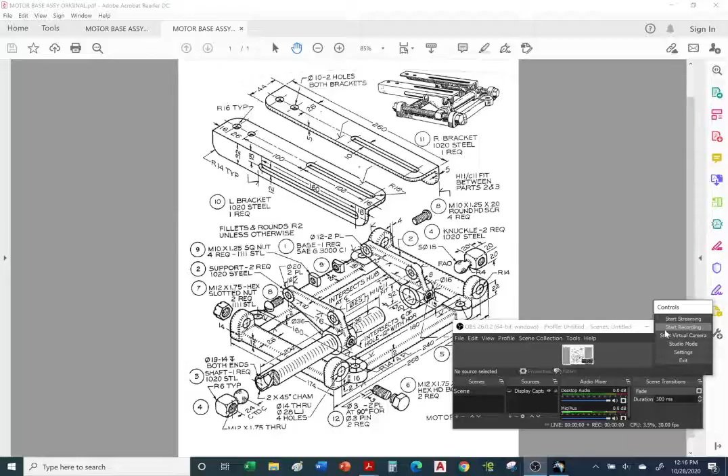Motor base assembly. For this assignment, you're going to model all the components for the motor base assembly. As far as the hardware, the bolts and nuts, you can either download them or model them yourself, but I'm also going to email you the loose hardware, bolts and nuts.

Notice that this is in millimeters, so units are in millimeters. You can tell by the threads. Anytime you see an M in front of a number, it's indicating metric units. In this case, 10 millimeters for the major diameter on the threads. Here's another example: a bolt with a major diameter for the threads of 12 millimeters.

Let's take a look at the base plate first. You're going to model the base plate first. This is probably the most complicated part you're going to model in this class, and this can be very confusing, so I decided to create a second handout. This is the original handout we've been using for years, so I decided to create a more simplified version and break it up into different pages.

Once again, we're going to model the entire assembly. This is the top assembly, and it's going to be made up of smaller assemblies: this smaller assembly, this one, and this one. Let's go to the next page so you can see the smaller assemblies inside of the top assembly.

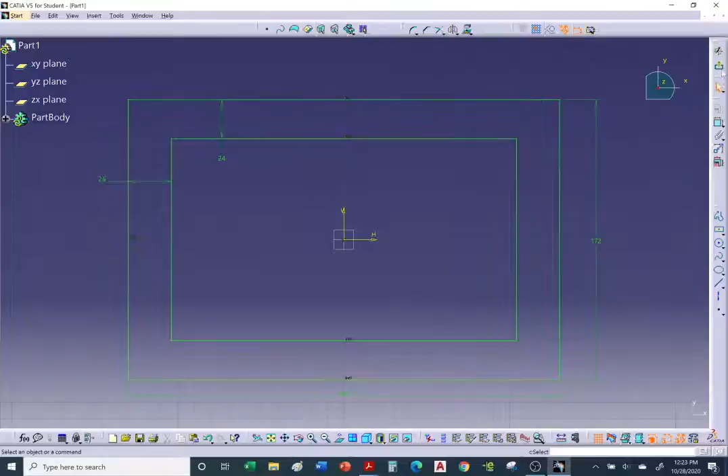Okay, so now we're going to do a pad. If we go back to the drawing, the pad will be 12 millimeters. Now we're going to cut it in half. We're going to go 6 millimeters in each direction for a total of 12.

Okay, so we're going to do a pad of 6 millimeters. Preview. There it is. But we're also going to mirror it so it goes 6 millimeters in the opposite direction of the sketch. There it is, preview, and that's a total of 12, and okay.

All right, so now let's do a sketch for the tabs. Okay, so we have our tabs. We'll just have to draw one, and then we'll do mirror to create the other three. Note the distance from the edge to the center of the arc or circle is 18 millimeters, and the radius is 14. We'll come back if we need to check the dimensions again.

All right, so we're going to do a sketch again, and I'm not going to do it on the surface. I'm going to do it on that same XY plane as the first sketch.

All right, so instead of using profile or arcs and lines and circles, I'm going to use elongated hole to create that profile. So I'm going to go to elongated hole, one of my favorite commands.

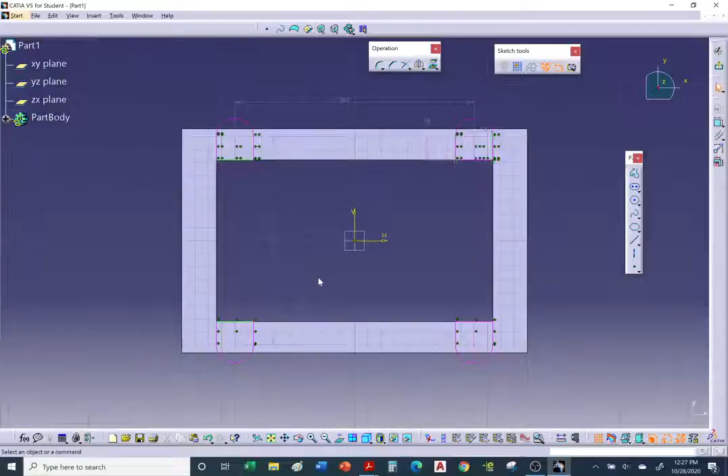Now it's over constrained. So we can either delete it, the 160, or double click and turn it into a reference element. It'll place it in parentheses and it's a reference only dimension.

Okay, click in space to deselect. Everything looks good. Let's do a tool sketch analysis. Everything is closed. Let's exit.

Now, one thing about the tabs here, I want you to notice it's centered with respect to the neutral axis of the first pad. That's because we did our first two sketches on the same plane.

Now, if we go to the drawing, you can see that the tabs are thicker than the frame. The frame is 12 millimeters, the pad is 16 millimeters. If you go back to the original drawing, you can see that the tabs are 16 millimeters in thickness and the rectangular frame is 12 millimeters. Okay, so we'll go with 16 for the second pad.

Okay, so we're going to select our second sketch, do a pad, and this time we'll go up to 8. And don't forget to mirror it, so it'll go also 8 in the opposite direction for a total of 16. And there we have it, as you can see.

Okay, now let's do the next set of pads. So now we're going to do this pad, and later we will address the issue of the 174 versus 172.

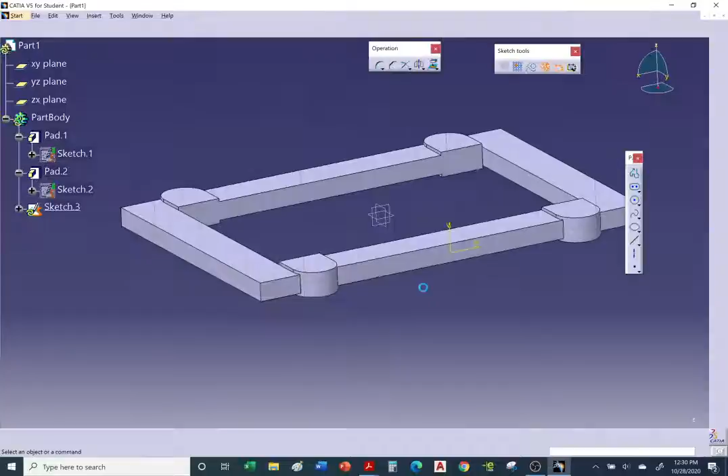Okay, so let's zoom into this area. Once again, I'm going to use elongated hole like we did on the previous sketch. Just guesstimate the size for now. Okay, so we're going to use a radius of 14.

Enter. And like on the previous sketch, we're going to draw a line from tangent to tangent point. We're going to now select the arc and turn it into a construction element. There it is, as you can see. Then click in space to deselect and turn standard back on, or else any new elements you create will come out as construction lines or dashed lines.

All right, so let's go ahead and let me hit normal, make sure everything is parallel. All right, so now I'm going to pick this edge, hold on to the control key, this line, and add a coincidence constraint.

And once again, the distance from the bottom of the surface to the center of the arc is 22. And we have a 4 millimeter offset from this edge of the rectangular base to the edge of the tab is 4 millimeters.

Okay, now we're almost there. Now here we have an issue. Notice there's a gap here. We need to fix this. There shouldn't be a gap here.

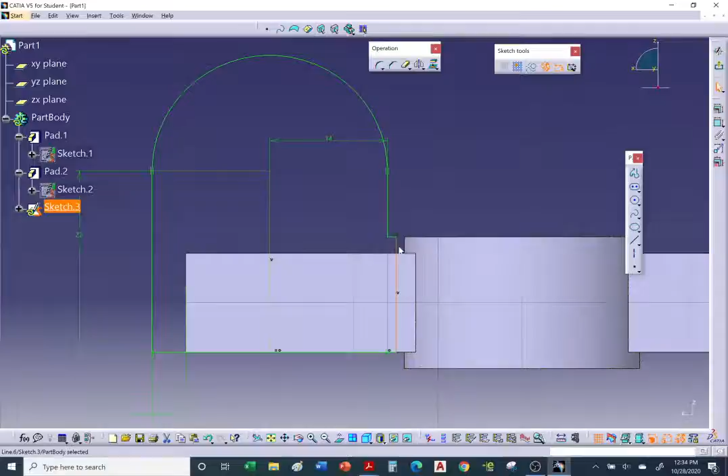Now we have a profile that's closed. One thing we don't want is this line to be too far from this tab, where it still creates a gap. We want to close off this gap, so we're just going to extend it so it clashes into this pad, which is okay. It's okay if we create a pad that clashes with another pad, it'll just blend in. So it doesn't matter how far in we go, as long as it stays inside this pad.

So I'm going to put a dimension here, and we'll just round it off to a nice number. I'll round it off to 10. It should work. There it is, and there's our profile.

Let's do a tool sketch analysis. Notice it's closed, okay, everything looks good. All right, so let's go ahead and exit.

Once again, we extended this so it can blend into this pad, so we can have a nice transition with no gap. Okay, exit. Oh, one thing I did forget to do is I forgot to mirror it over.

Let's go back to the sketch, double click on the sketch. I forgot to mirror it over to the right side. Let's select everything, do a mirror about the vertical. There it is, tool sketch analysis. Good, everything's closed. Yep.

Exit, and we'll do our pad. We'll do our pad and then mirror the pad over to the other side. Let's take a look at the drawing, see how much the pad is on this one. Here it is, 14. Okay, so a 14 millimeter pad for this tab.

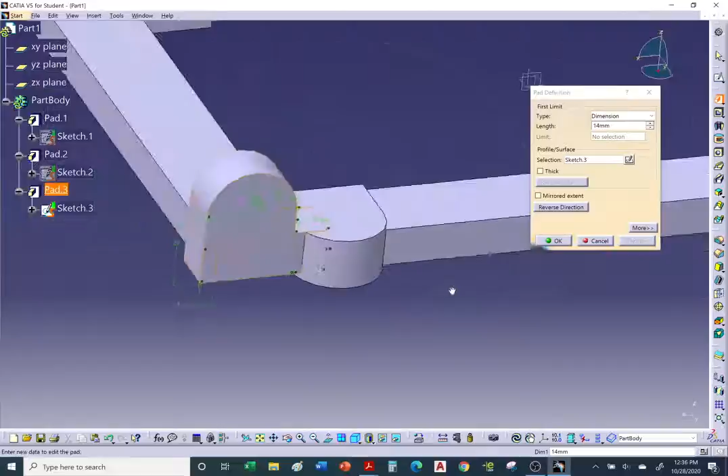And okay, notice there's no gap now. That's what we wanted, we wanted to get rid of that gap. That's the reason we extended, so it did blend into this solid.

So it did a Boolean operation and just blended the new solid into this one, and same into the frame. It did blend it in.

Okay, so now let's mirror these two tabs. I'm going to select the pad, the last pad we created, and we're going to use the mirror. Use mirror, and we're going to mirror it about the vertical. Oh, wrong one, this vertical. There it is, there's a preview. Hit preview to see the solid. Looks good, and okay.

All right, so everything looks good. Now let's address the 174 dimension. So going back.

Okay, so remember we talked about the 174 versus the 172. It's 172 from here to here, but 174 from this edge to this one. So let's check those dimensions.

Now, if you want to leave it alone, I'm not going to take any points off. If you want to leave it the way it is, it's okay, I'm not going to take points off. I know this is a very complex part, so I'm being lenient on this one when it comes to grading. But if you want to fix it, let's take some measurements just to double check.

Use your measuring tools. So this is 172, as it should be. But from here to here should be 174, and it's not. So if you wanted to do it correctly and fix this...

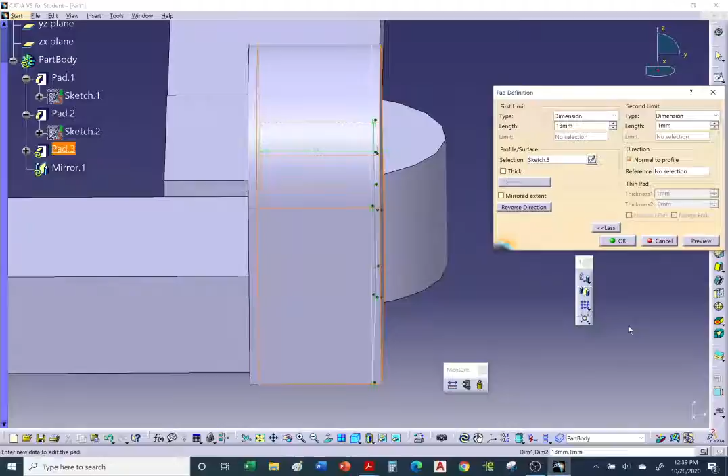Preview, there it is. But now we have a thickness of 15, 14 plus 1, so we need to drop this to 13. You can see we're going to remove 1 millimeter from this side to make up for the extension on this side. 13 plus 1 is 14, so that'll work. It'll also update the other 3 tabs. So now when we take our measurement from this face to this one, we get 174. It's been fixed and we're good.

Okay, let me remove this. I don't need it, delete it. All right, so we still have the holes and we have fillets, and we'll be done with this.

Let's look at the original. Notice how there's fillets. So this is either an aluminum or a steel. Oh, it looks like it's steel.

Okay, so this appears to be a steel base plate. So the base plate was casted in a mold. So it was liquid metal poured into a mold. And once it's dried and cooled down, it'll be taken out of the mold and then it'll be machined.

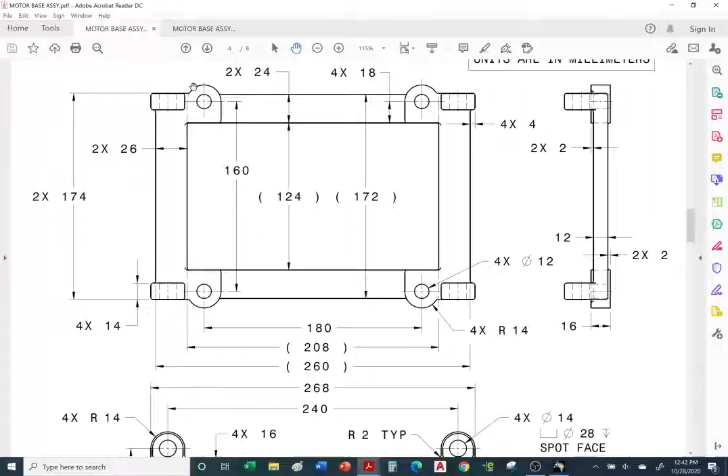So the rule is anytime you create fillets, you wait towards the very end to create your fillets. When it comes to a straight edge, fillets are no problem. It's when it has to turn. Anytime a fillet is going around a curve, let's use this one as an example, sometimes it doesn't know which direction to go, and it can stop, or sometimes it'll give you an error message.

So you always save fillets for the very end, especially where there's a lot of twists and turns, especially in aerospace. A lot of the machine parts are not rectangular, there's a lot of curvature to them. Sometimes the fillet will not know which direction to go, and it'll give you an error message, or it'll conflict with another existing fillet. So all rounds are 2, and this will be optional. Let's go ahead and do some fillets, and once again, if you want to leave them out, you may.

Okay, I'm going to do the fillets for practice, or for those that want to see how to create them. I'm going to use the fillet command a few times, so I don't have to do fillets all in one shot. If you try and do too many fillets in one shot, there might be error messages, and it's going to be hard to find where the error is at. So I'm going to do a few fillets at a time, starting with the fillets around this tab first.

So I'm going to use the fillet command and a radius of 2. Notice that the default is tangency. Let me explain what that means. If I was to pick this edge, it'll turn red, and notice this here turns like a red dashed line, letting me know, hey, even though you chose this edge, it continues with tangency, and it ends here, it'll terminate here. So even though I only selected this edge, it recognizes tangency and it keeps going till there is no more tangency.

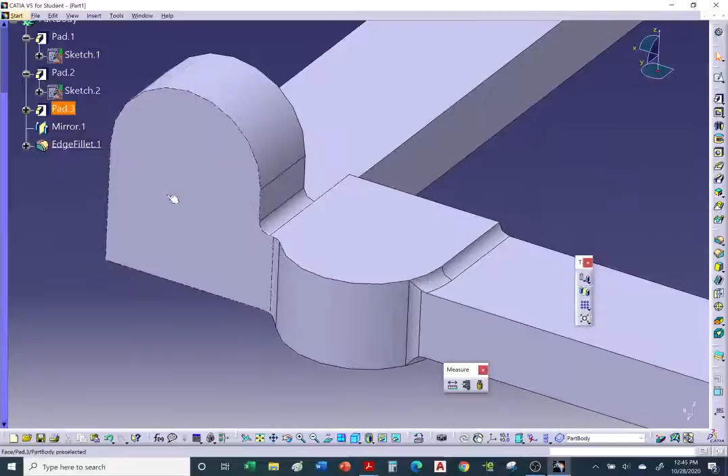All right. Okay, so let me add a few more fillets. I'm also going to add this inside fillet here. And I'm going to do this corner fillet here. And hit OK. So once again, I added the fillet here and this one here.

And later on, we'll do a fillet along this path here, or this edge. Okay, so I'm going to go ahead and repeat it for all 4. So I'm going to just double click on edge 1, fillet, or edge fillet number 1, instance 1. Notice I've selected 9 elements.

If I was to hit this little bag here, think of this as a little bag of edges that I've chosen. So it's telling me these are all the edges I've chosen. You can remove them, you can replace them, you can just deselect if you want. If you want to remove a fillet, you can always click to deselect, or you can remove it from here. I'm going to close this sub window here.

All right, so you're going to see this increase in numbers as I pick more edges. Okay, so let's go to the other side, and I'm going to pick the same edges as the first one. If you select an edge by mistake, let's say I chose a surface by mistake, it lights all this up, you can always click on it to deselect to remove it.

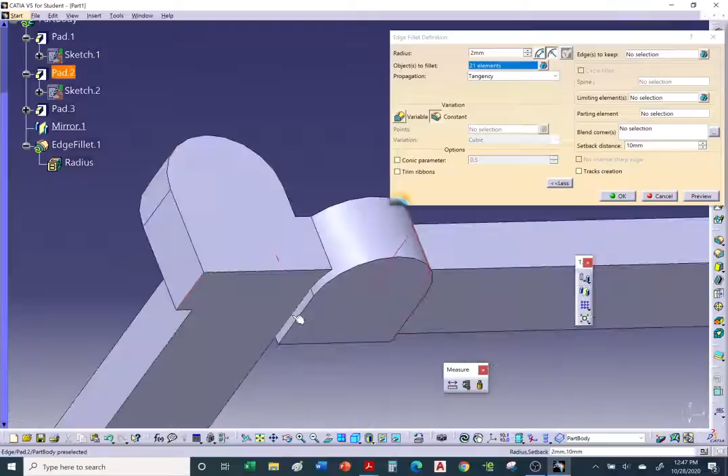Again, this is optional. Okay, let's go around the tab here. And it continues on, okay. I'm just gonna go a little bit faster. Okay, and hit OK, make sure everything looks good, yes.

Okay, let's go to the final corner here. May have forgotten, yep, I did forget the one on the other side. Select this edge. Okay.

And again, just to emphasize, typically you wait to the very end to do fillets. We still have to do holes. Oh, notice how I mistakenly clicked this surface. Let me click it to deselect. There it is, and OK.

All right, so that's one fillet operation. All right, so now I'm going to do a second edge fillet operation, and I'll do the rectangular area. Okay, so now I'm going to fillet the rectangular area.

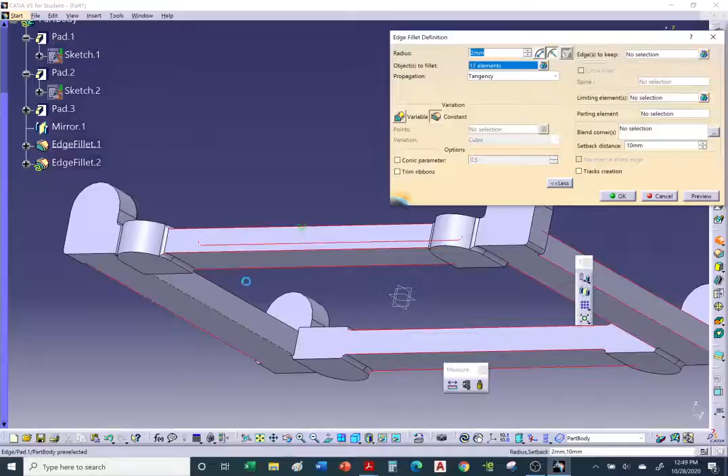Okay, I think I got all the rectangular area. And hit OK. There it is. Oh, I did miss the inside area.

Okay, so one thing I did miss on the first one is forgot this edge. So even though I picked this one, it didn't fillet this area. So what I'm going to do is go back to the first one. Oh, it happened in all of them. It only did this portion. It didn't continue on as I expected it to.

Okay, so I'm going to go back to the first fillet, edge fillet, instance number 1. Well, my mistake, it did do this one. So I'm going to have to do this portion here.

So what I'm going to do is go to edge fillet number 2. Let's see what happens when we pick this edge. Hit OK. All right. So it was edge fillet number 2 that I forgot.

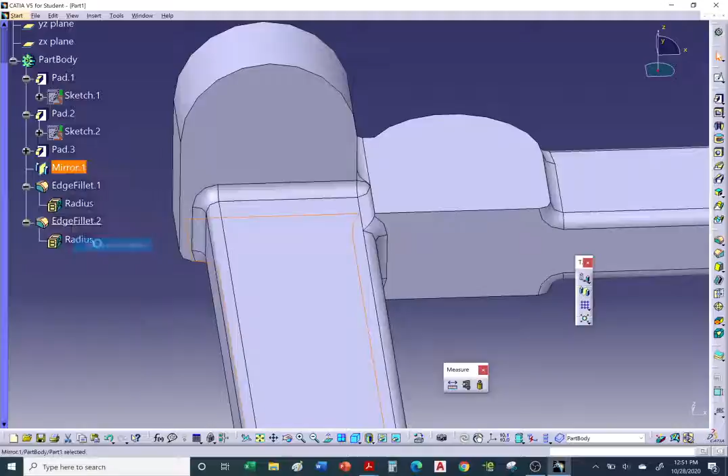Now, one thing you can always do is go back in time. If I want to see what it looks like without the fillet, I can right click, define. It'll place these as dormant, ignore them, and only show you the history up to this point. It's like going back to the past. If you want to come back to the present, right click on the part body and define, and it'll bring you back to the present.

Okay, so I'm gonna have to do this also for the others. So let's go here, edge fillet instance number 2. I gotta go back and do these which I missed, so now I gotta go to all 4 corners. Okay, there it is, I think I got them all. Let me double check, make sure I didn't miss anything.

Now there may be a concern as to how this can be manufactured, as far as the mold to make this part when you pour the liquid metal in. But that's a whole different topic, it's not covered in this class.

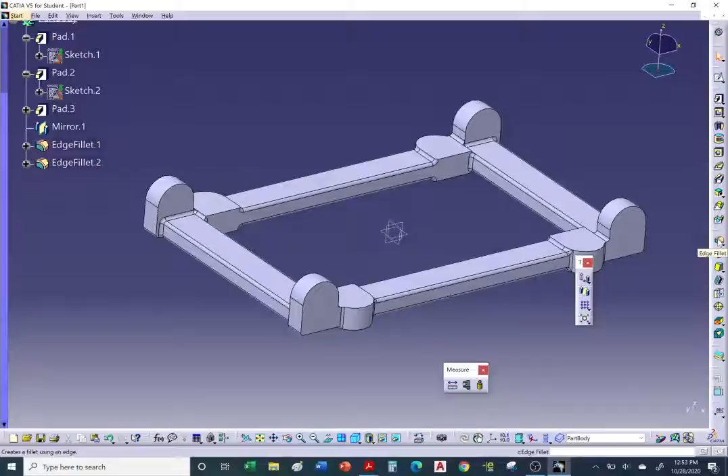All right, so now let's go ahead and put fillets around the vertical tabs. Let's create a new fillet instance, edge fillet instance, that'll be instance number 3. Let's do 1 tab and see what we get. I'm going to select the top of this one and top of this one. Hit OK and see what we get.

Now it's just giving me a warning, like, hey, double check that this is what you want. This is a very common warning when you create fillets. It's basically telling us, check if this is what you want.

One thing I did not want to fillet along this edge. If you go back to the original handout, notice there's no fillet on this edge, and the reason is because this is machined. So maybe it did have a fillet at first and it had excess material beyond 16 millimeters in thickness, and then the machine shop came in and smoothed this out, because most likely a bolt is going to bolt this onto some type of work table.

Again, we don't want this edge with the fillet, so we need to fix that. I'm going to double click here.

Notice we mentioned tangency before. Let's see what happens when I go to minimal. I don't want it to continue its path along a tangency. Because tangency was the default, it kept filleting and going around because it recognized there was curvature or tangent continuity. So I'm going to take this off, go to minimal. Notice it already removed it. I'll hit OK, see what we get, and it stopped. Good, so it stopped.

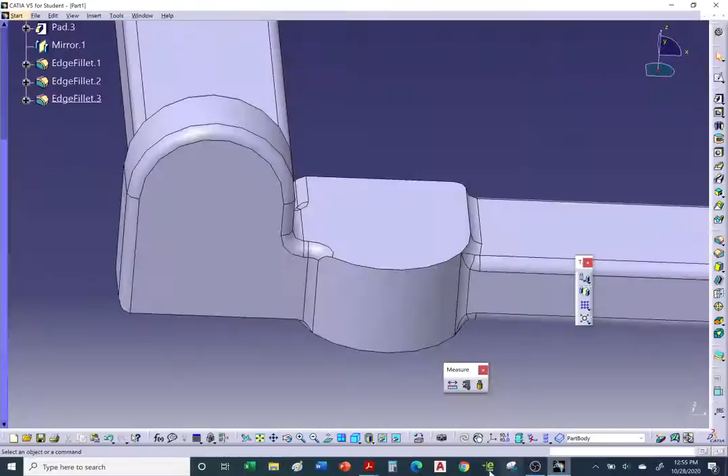Now we may not need to fillet this area. If we look at the PDF file, it kind of fillets this area. We'll just leave it the way it is. Maybe there's no fillet here, but we'll just leave it to save time.

Okay, so let's do it on the other 3 tabs. Let's double check here, make sure everything else is okay. So let's double click on edge fillet 3, or the last one that you created, and do the same thing for the other 3 tabs.

And if you were to show this to an NC programmer or a machinist, they'll probably say, hey, we don't like your fillets, you need to go ahead and fix it because it's difficult to machine those fillets. That just comes with experience, and also you can get advice from a more experienced tool designer or machinist. And okay, there it is.

All right, so now we're going to do the holes. We're done with the fillets, let's do holes now.

Let's do these 4 holes first, which have a diameter of 12 millimeters. So 4 of them, diameter 12. One thing I'm going to do is pre-select the edge, the arc, so it'll center the hole. So click on the hole command, click on surface, and we have a 12 millimeter diameter, and we're going to go up to last. It'll go all the way through, and okay, there it is.

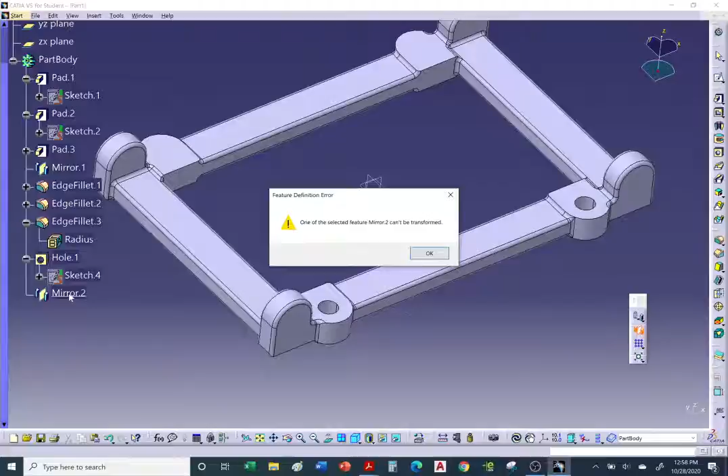Error message. It's telling us, hey, you cannot mirror a transformed element. In other words, you cannot mirror a mirrored element. So it gave us a warning, so I'm just going to cancel that. Since this hole was mirrored, you cannot mirror a mirrored element or a translated element.

So we'll just do it manually, one at a time. We'll do the same thing we did here on this side. Create a hole. First select the arc so it centers it, and then click on the hole command, and okay.

Okay, now we'll mirror that hole over to the other side. Let's go ahead and mirror at the vertical. There it is. And okay. All right, we have the 4 holes. Okay, so now let's go ahead and do the other 4 holes.

This one's a little tricky. If we go to the original, we're going to drill a hole because we have this bolt. Notice they're showing you a cut-off version of the bolt. It's actually a long bolt that goes all the way through, so they're not showing you the entire length of the bolt. So they removed this portion.

Notice there's holes in the screw, and there's slots in this castled hex nut. That's so you can add a cotter pin so that the hex nut doesn't loosen up from this long bolt that goes through this hole and exits this hole.

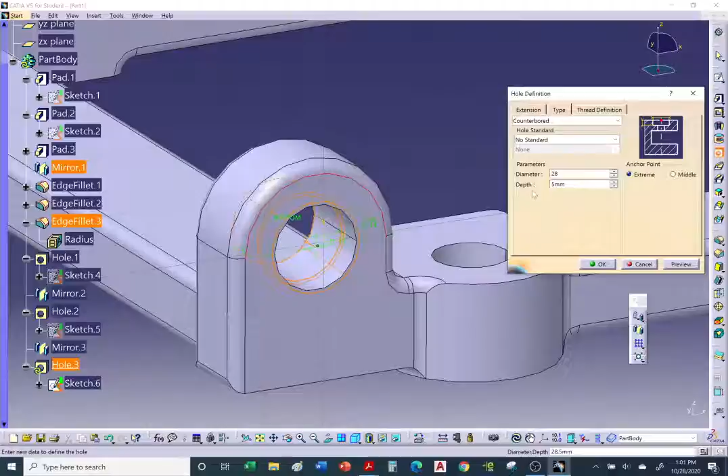In this case, we're just doing a spot face. We're barely kissing off the surface to remove the rough area to accommodate the head of this bolt. So diameter of 28, and preview. Notice it's cutting through, but we don't want to go that deep—we're just going to kiss it. So we're going to put a depth of 1 millimeter.

And okay. Notice it just removed part of the rough area. If you want to go 1/2 millimeter, go for it. So we're just kissing off the rough surface due to the casting.

Now I'm going to go down to 1/2 millimeter. I'm going to go back to the hole command, go to the type tab, depth, I'm going to go 0.5. Preview. Yeah, that looks a lot better. And okay. A lot cleaner. This is referred to as a spot face or a counterbore hole.

Okay, so I'm going to repeat the same thing.

Okay, so I'm going to do the exact same thing on this side, and it should use the default measurements I used earlier, the default diameter and depth. So I'm going to pre-select the arc, click the hole command, click on surface, and there it is. It remembers the last inputs, and there it is.

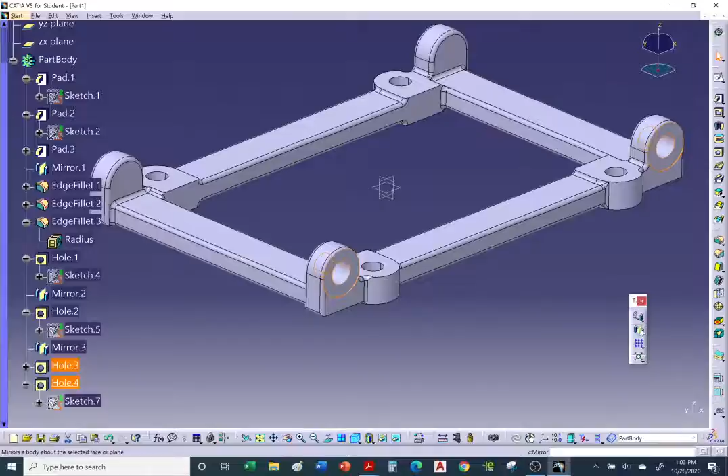Okay, now what I can do is mirror these two. I'm going to pre-select the two holes and mirror them over to the opposite side. So let's use mirror, and we're going to mirror about the vertical, the ZX plane. It's already given us a preview, and okay. There we go. We have our spot face and holes.

All right, once again, don't worry about the fillets. If your fillets look different than what I modeled up, it's okay. We can spend a whole semester just talking about fillets. Fillets take experience to know how to edge properly, especially when there's curvature involved. You also need to have some machine shop experience or NC programming experience.

The NC programmer for the machine shop will tell you if it can be done or not, or advise you on how to fix that. All right, so that was the base plate. So let's right click on the part, right click properties, and let's give it a name, base plate. Okay, and let's move on to the other parts, which will be a lot easier. So we're done with the base plate.

All right, let's move on to the next part. Okay, let's do the bracket. This is very simple, we'll do an L bracket shape. This bracket has a measurement of 44 by 32 and a thickness of 5. So we're going to make an L shape of 44 by 32.

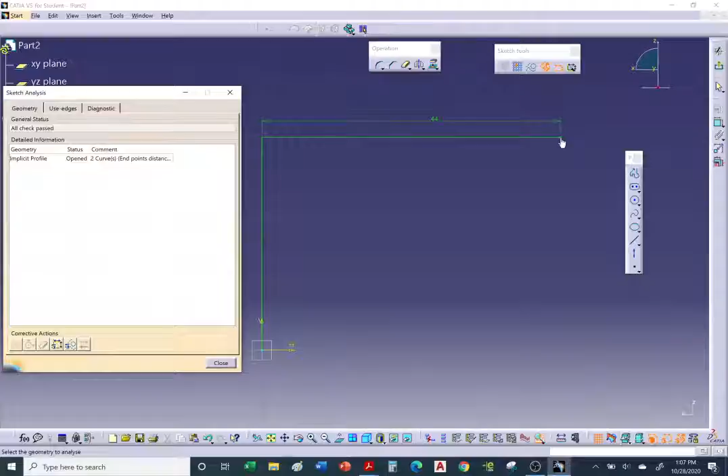That's all we needed, tool sketch analysis. It's going to warn us, hey, this is open, it's not closed. I want you to notice that in cyan, it shows us where the mistake is at. It's telling us there's a gap or there's an overlap. Okay, I'm going to ignore it and exit the sketch.

Okay, now I'm going to do a pad. And when I do a pad, it's going to give me an error message saying, hey, this is not a closed profile. But you know what, if you pick the thick option to thicken it, then we'll accept it and say yes, we are going to thicken it. All right, so...

Let's first get the length of this bracket. So the overall length is 260 and it has a thickness of 5. So 260 for the length. And preview. It's still warning us, hey, this is not a close profile, you need to use thicken. Okay, so I'll hit OK.

So here's the thick option, click on the thick option. And for thickness, we're going to go 5. So you can thicken in two directions, inward or outward. Let's thicken this to 5. It's going inward, that's what we wanted.

Okay, you can always thicken in two directions. We're going to go inward as far as the thickening. We can also go outward, as you can see, but we're not going outward. I'm going to go back to 0. Preview, and there it is. And OK. Okay, we got the difficult part done.

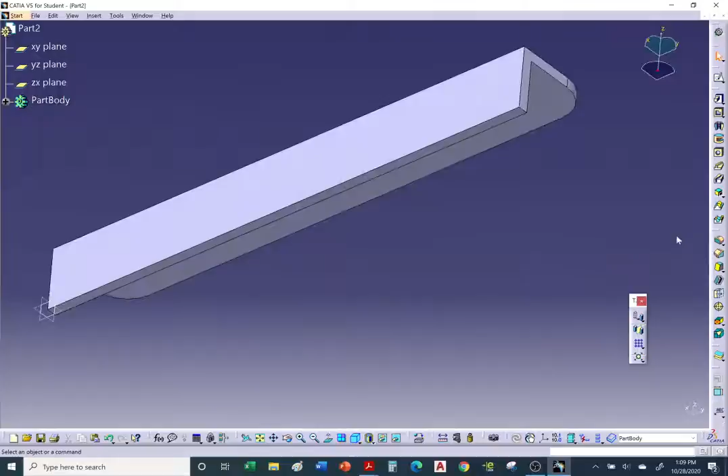Typically, when you do these 4 corners with fillets, you want to keep them the same. In this case, they're not, so one pair is 16. Fillet this corner, and this corner was also 16. Type in 16 for your radius. There it is. And for the bottom, we're going to go with... my mistake, 14. Okay, 14, not 16. And there it is.

Okay, so now let's go ahead and do our sketch up here. Typically we want to do it on a plane, but we don't have a choice here, so we'll use the surface.

So we do have a slot and we have 2 holes. Now they do line up with the fillets here. So let's start with the elongated hole, one of my favorite commands, right?

So we'll do an elongated hole and then we'll put a constraint with the arc. I'll worry about the dimensions later.

Now I accidentally added a constraint that I didn't need. It's making a tangent to this one, so it generated a constraint I didn't need. Let me darken this just so you can see it. So it generated a tangency constraint, as you can see, which I didn't want. So we can go to the constraints tree, and it's the last constraint here. So I'm going to just right click and delete it.

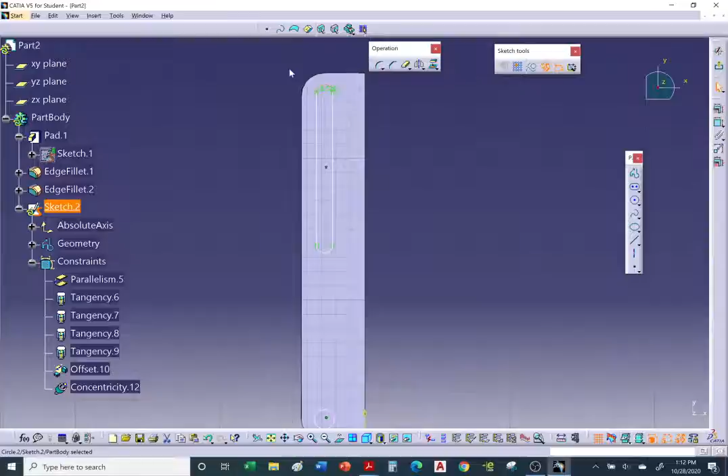So I'm going to add a relationship between this circle and the arc. Hold on to the control key, click on the arc, and we're going to make it concentric. There it is, so now the hole is centered with the arc. We're going to do the same thing with the slot: pick this arc, hold on to the control key, click the arc, concentricity, and OK.

And we have another hole. Now we do want to line it up with this one, so I do want to track. I want you to notice that this hole, if I grab it by the center, it's constrained to this one, or at least it appears it is, or else it's constrained to this line. Oh, I didn't constrain it. It tracked this point, but it actually constrained it to this center line, which is fine, because I think these two holes are centered about this line of the elongated hole.

All right, so let's go get some measurements. Let me go ahead and turn this just so I can match the drawing. All right, so elongated hole, it has a radius. So what is the radius? Well, it's just half of 10, which is 5.

So they're giving us this distance instead of the radius. They do have a relationship because these horizontal lines are tangent to the ends of the arcs, and the arcs are 180 degrees. The radii, or diameter I should say, of the holes are 10, so it just happens that the arcs are the same size as the holes. And then we have this distance of 26, and the elongated hole is 102.

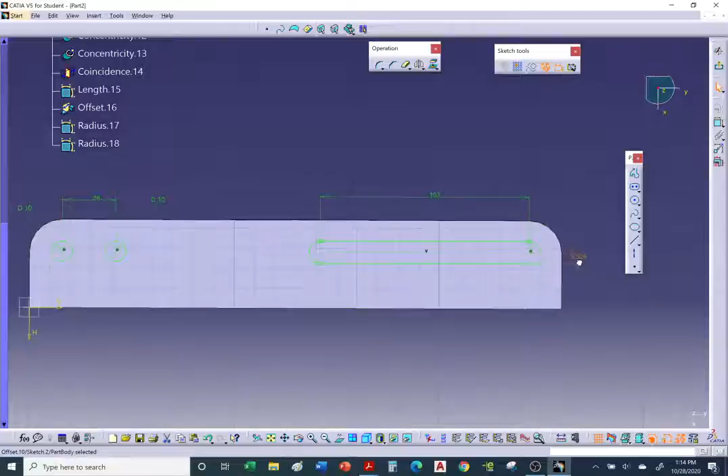All right, so let's take a look at the radius here, which is 5, half of 10. So let's change this to 5. And there it is. Do a tool sketch analysis. Everything is closed, good. And we'll do our pocket.

Okay, let me just double check the dimensions. Yep, 102, 26, and 10. All right, so let's exit and do a pocket. And up to last, and OK. And there it is. Okay, so now we need to do our sketch for this wall here.

Okay, so we have a slot.

Okay, so this slot isn't lined up with the arc. It should have been, it's probably a mistake on my end, but it's okay. We'll just follow the dimensions here. If your dimensions are off, again, I'm not going to take any points off.

Okay, so we have a distance of 18 from this edge, and this slot is 12. And from the edge to the center is 18 also, just like this 18. The slot size is 12 and 160 in length.

So let's do a sketch on this surface. But you know what, if we have a plane, let's do the plane. I'll pick the plane instead. Do our sketch.

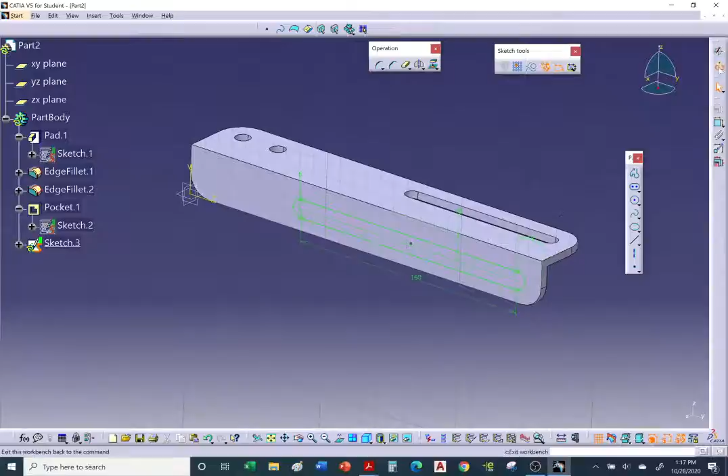Let's do a tool sketch analysis. Everything's closed, everything's good. And let's exit and do a pocket, up to last, and okay. And there it is, we're done with our bracket.

Okay, I don't think we missed anything. Got all the features. Oh, I'm missing the radius of 2. So we have a fillet here of 2, and actually along the inside edges. So all the inside edges have a fillet of 2.

Okay, so let's do a fillet here first of 2. Okay, so 2 radius and okay. All right, so let's double click and let's add more. Let's see if it'll let me add this edge. Let me hit OK, see if it'll accept it.

Okay, notice how it does a turn here. So I'm going to do it in steps. I'm going to remove the second edge that I chose. I'm going to remove this one by selecting it and only keep the original one, the one edge that we selected. I want you to notice that we're going to get a different result when I do a second edge fillet. So I'm going to do a second edge fillet.

And by clicking this edge, it's going to go all the way around. Notice it follows tangency because that's the default. Preview and hit OK. Notice how we get a different result by doing 2 separate edge fillet operations versus 1. It'll give you a different result.

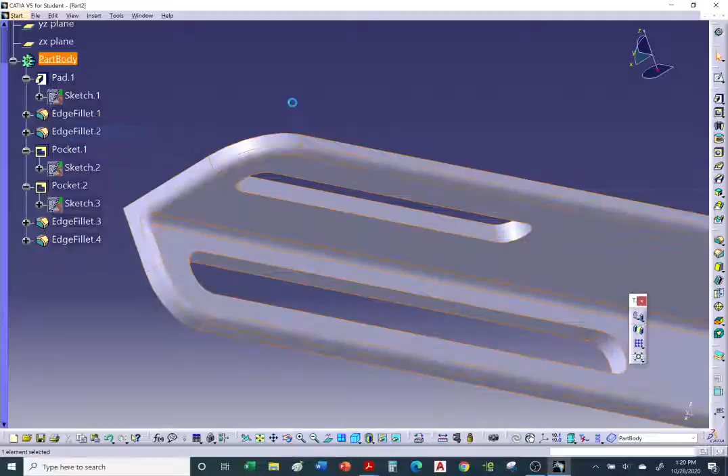So we can go back to where we were. There it is. And to come back to the present, right click on the part body and define. There it is. Okay, so we're done with this part. Let's go ahead and give it a name. Right click, properties. Okay, and we'll call it bracket.

And okay. You know what, let's give it some color. You don't have to do this part, but it's good practice. Right click, properties, go to graphic tab. I'm going to give it some color. Let's go to more colors. And I'm going to pick, it's good to pick soft colors. Soft colors for the large pieces and bright colors for the small pieces, like the hardware.

Okay, so give it some color. I'm going to go back to my base plate and give it color. Right click, properties, pick whatever color you want. If you want to make it yellow, keep in mind it's going to be bright, it's going to be an eyesore. I'm going to give it a purplish color, nice soft color. Okay.

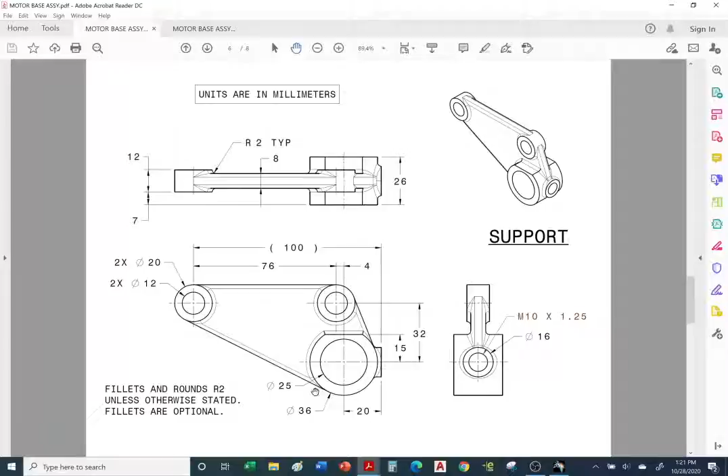All right, so now let's move on to the next part, which is the support. All right, so there's different ways of doing this. I'm going to use profile. We can also draw circles and then connect the circles with lines for our sketch. Okay, so we're going to start by first drawing this wall or this flange, and then we'll come back and do the bosses.

Okay, let's do this sketch, and it has a pad or thickness of 8. All right, so I'm going to do a rough sketch first. And I'm going to have the origin here at 0, 0. All right, so let's start with this simple sketch.

Okay, so let's go to start again, mechanical design, part design, and even though we are in part design, when we click it again, CATIA knows that you want a new part. Okay, and I'm going to pick a vertical plane. I'll pick the YZ plane, do a sketch.

And again, I want the main hole here at the origin. All right, so I'm going to use profile. Okay, so use profile. And let's go ahead and start. So I'm just going to guesstimate, work my way around here. So we have a hole here.

Click, there's our line, and then I'm going to go arc. So I have an arc here. Again, I'm just going to guesstimate the shape, and I can always fix it later. I want tangency. Click, arc. I'm going to intentionally do it all messed up. Click. And another arc.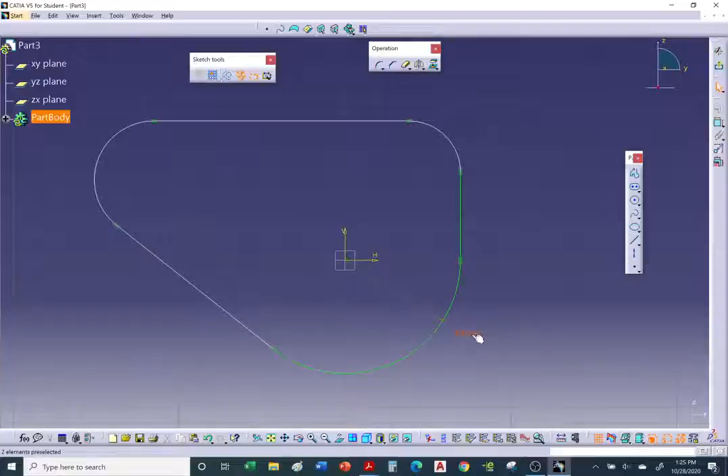Oh, that's a very large radius, so it may really shift our sketch. Okay, so this is 18, let's see what happens. Don't worry if our sketch goes flying because of this drastic change from almost 70 down to 18. And okay, all right, okay, not that bad.

Now let's do the smaller ones, which have radii of 10. Okay, not bad, let's do the other one. Also 10. Whoa, it went flying, it's okay. You can always grab, since it's not fully completely constrained, we can just grab it and adjust it, as you can see. We can adjust it. Whoa, you don't want to do something that drastic, but don't be afraid to grab onto the geometry and slowly pull, see what happens to it. And we can readjust it. That looks about right, let's zoom in.

Okay, so now we need some overall lengths from center to center. And again, I'm emphasizing that this arc is centered with the origin. Later on, it'll be easier when we do the other features on this part. All right, so we have a distance of 76, center to center, and 32, center to center. Oh, and I have a mistake, this is not vertical, so I'm gonna have to come back and fix this. I'll remove the vertical constraint. Okay, so 32 and 76.

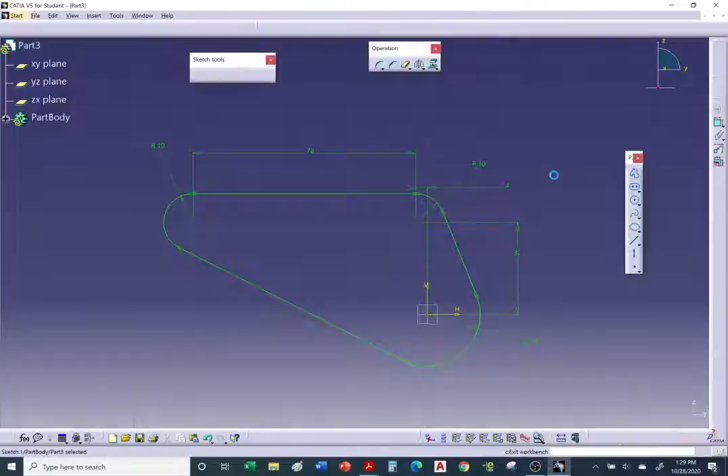And let's do our pad. I think it has a thickness of 8, so let's do a pad of 4 in each direction. I want to keep it symmetrical, so let's change this to 4. Preview, and then we'll mirror it so it goes 4 in the opposite direction. Preview, there it is, okay. So there's the main part of that support. Okay, and yes, it's 8, so we went 4 in each direction.

Okay, so now we're going to do the bosses. We're going to draw circles, so we're going to create another sketch and create these circles and this circle with the flat top. Okay, so let's go back. All right, so I'm going to sketch on, you can do it on the surface. I prefer to do it on the plane, which is in the neutral position with respect to the thickness of this wall.

Okay, so let's do a sketch on that plane. I'm going to create a circle, I'll just guesstimate for now. We have a circle here, circle there, and a circle centered with this one.

All right, so we're gonna put a coincidence constraint between the arcs and the circles. Hold on to the control key, select the arc, and put a coincidence, and notice it takes care of the position and the size. Hold on to the control key, hit the arc, click the circle, and put a coincidence, and it centers it and also takes care of the size for us. Do the same thing with this one, and coincidence, and okay. There it is.

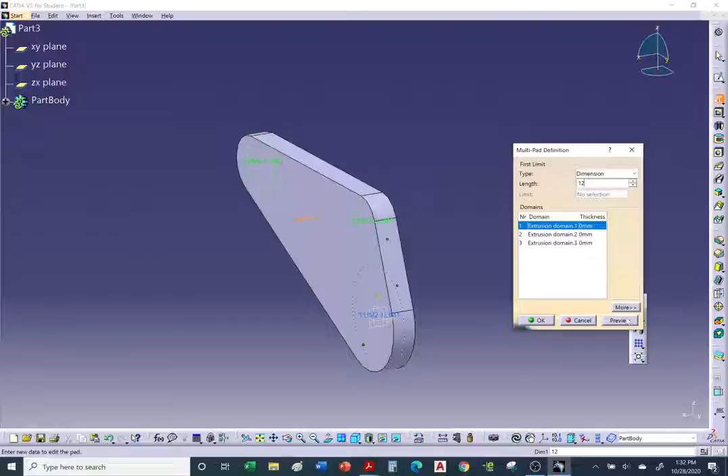My mistake, I gotta do it here. Click here, we're gonna give it a thickness of 12. Oh, I picked the wrong one. That one has a thickness of 26, or I should say 13 because we're gonna mirror it. Let's see if we have a mirror option here. There it is, so we can also go 13 in the opposite direction. Did not have a mirror, so I'll just manually type in 13. Preview. There it is, total of 26.

Now let's go to the next one. So the next one, we're going to go 6 in each direction. And preview, there it is, total of 12. And finally, the last one, same thing, we're going to go 6 in one direction and 6 in the opposite for a total of 12. Preview, and there we have it. There's our bosses. And okay.

Now, one mistake I did do is I forgot the flat top, right? Forgot to include the flat top on this lower one, so let's go back and fix that. It's okay, completely missed it. Let's go back to the sketch. Okay, so we need to add a flat top here.

So I'm going to draw a line going across and then on the circle. Make sure it's horizontal, and there it is. Okay, so make sure that the endpoints land on the circle. Same thing with this one. All right, so we need a dimension here to locate this, and then we'll erase the top portion. So this horizontal line is missing a dimension.

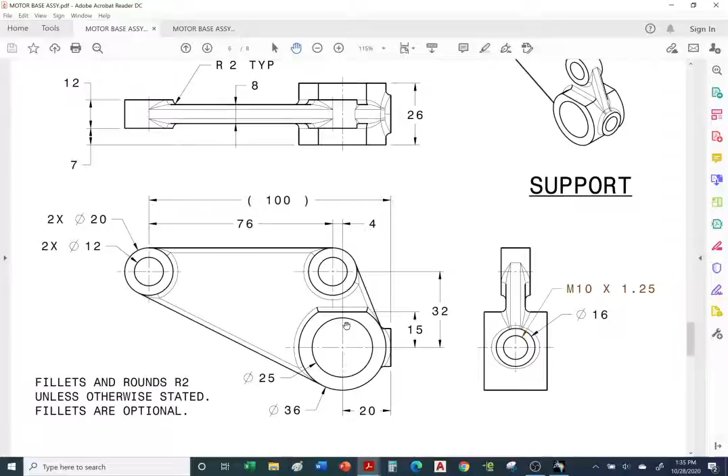Okay, now fillets. Fillets are a nightmare. So I'll leave that up to you if you want to fillet this object. Okay, so we have fillets of 2, so typical radius of 2. Okay, so all the rounds are 2.

But before we do, I forgot to add this little boss. Luckily, we have this hole centered about the origin, so that'll help us create the surface here, or this pad here.

All right, so we're gonna do a pad with the vertical plane here, and we're gonna sketch it looking this way, looking horizontally on the vertical plane. So we're gonna draw a diameter of 16. Okay, so let's go back.

So on this vertical plane, in this case the ZX plane, I'm going to draw a sketch. Okay, and I'm going to make a circle of 16. And again, we're using that same origin. Okay, diameter of 16. Okay, notice the sketch is in this vertical. Now the pad is out here, but that's okay, we'll come back and fix that. And exit.

Okay, so now we're going to do a pad of this circle. We'll do a simple pad. And I don't know the dimension, I'll have to go back and look at it. Let's just do a preview here. Okay, there it is, there's our pad. Hit OK, and there's the pad.

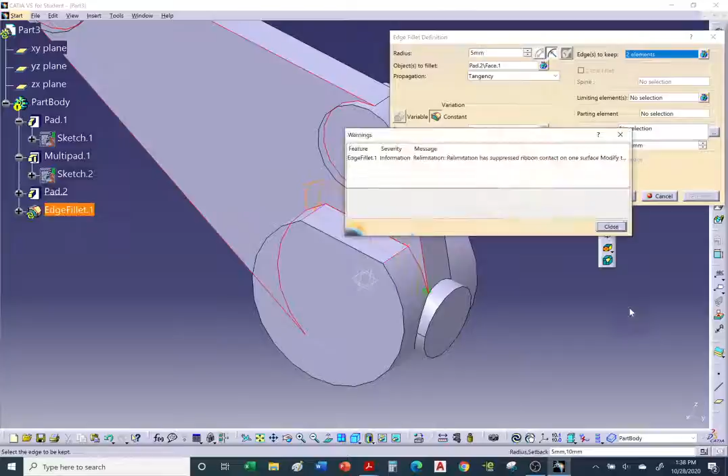Let's see if it'll allow it to. Preview, and it looks like it did accept it. Close. Oh, and obviously the fillets are way too large, that could have been another reason for the error message. So the default was 5, I changed it to 2. And it did accept it.

Okay, so edges to keep. So that worked. Now let's do the same thing on the other side. I'll do it as a separate operation and fillet. Let's see if it accepts it. Hit OK. And this time it did work without having to pick the edges to keep.

So in the previous one, the fillets were initially too large, and I chose edges to keep. Let's see what happens if I go back and remove those edges from the first fillet. I'm going to deselect them, I'm going to remove them. Oh, my mistake, cancel, go back. And I'll just remove them here from the list. Remove, remove, see if it'll accept it. Removing the edges to keep. OK, and it did accept it.

Notice how we get a funny one for this one. So this is very common. Even though it's a mirror image, notice how the fillet on this side looks different from this side. It's the way it generated the fillets, maybe it started on one edge for one and a different edge on the other one. Okay, we can go in circles trying to fix this, I'm just going to leave it alone, I'm just going to let it be.

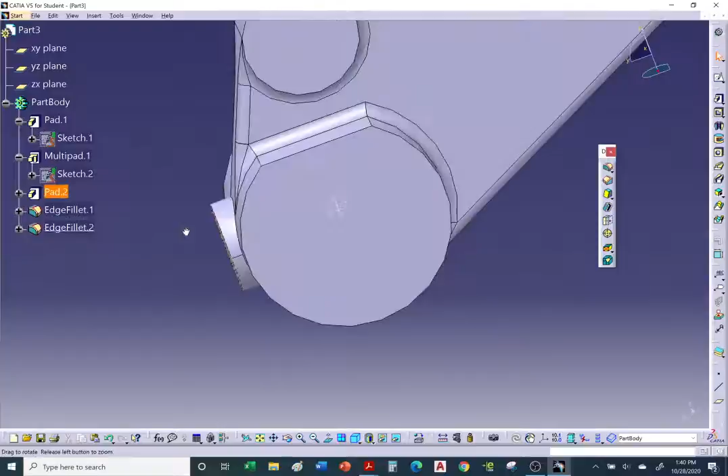All right, so now let's try and put a fillet around this one. See if it accepts it. Okay, did accept it, all right. Okay, I'm not going to try and go back and figure out why this didn't work, I can spend quite a few minutes or maybe an hour trying to figure it out. I'll just leave it alone.

All right, so let's look for more fillets. Okay, I think we got all the fillets.

All right, if I missed any, that's okay. Let's just move on. So now let's draw the holes, or create the holes.

We have a 25 diameter, 12 diameter, and this one is a threaded hole. The M is for metric system, so we have an M10, meaning a 10 millimeter diameter threaded hole. So this is a tapped hole, it has threads. We never model threads because it eats up a lot of memory, so we'll just do it as a plain 10 millimeter diameter hole.

Okay, so let's go and place the holes into this part. Let's do the 10 millimeter one first. I'm going to pre-select the edge, and we're going to drill a hole through the surface of 10 millimeters. I'm going to go about halfway. Oh, my mistake, 10 millimeter diameter. I'm going to go up to this plane, so I want to drill that hole up to a plane.

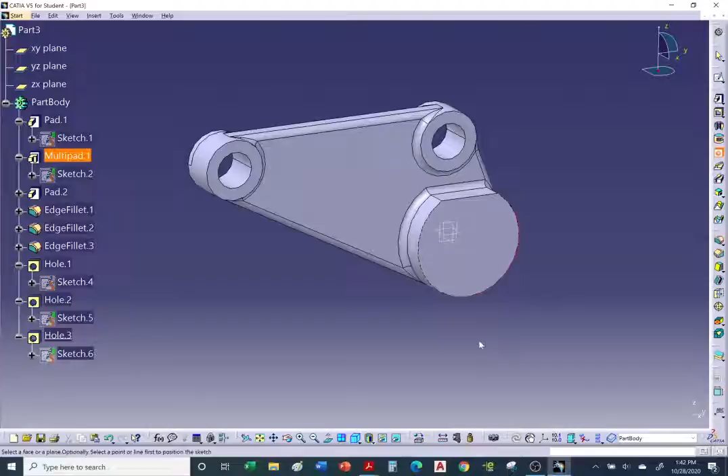So you can click the hole command and then click the edge, the arc. It'll center it. There it is, and 25 diameter up to last. Okay, there it is. Notice it took care of this hole, which is fine.

So this is a threaded hole where a set screw, it's just a screw with no head, goes. The reason it doesn't have a head is so that we don't over tighten it. And these are just smooth, simple holes.

All right, so let's double check, make sure I didn't forget anything. Looks like we got it all.

All right, so let's name it support and give it a color. Right click, properties. Let's go ahead and give it a name, product, support, and okay. Oh, I forgot to give it color.

Right click, properties, go to graphic. Oh, my mistake, I need to right click on the part body. Let me close. Right click on the part body, properties, and that'll allow me to give it color. Go to the graphics tab. I'll make this tan or light brown. There it is. All right, so we're almost there.

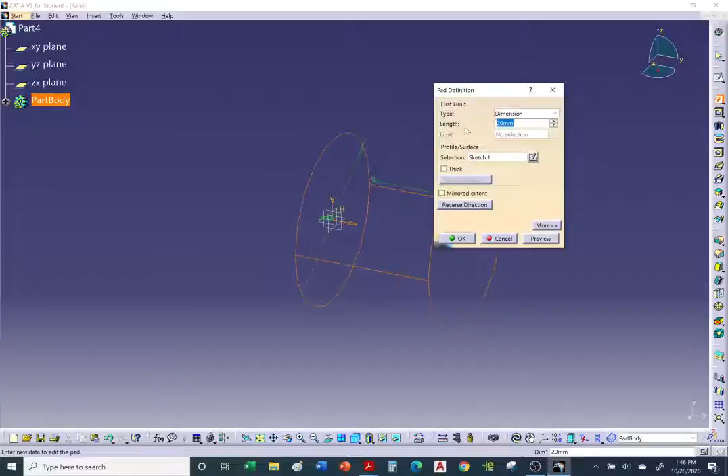Okay, so pad, sketch, 102, 102, preview. And let's use the mirrored option. And okay. All right, so now we need to add some holes.

Okay, so the holes, diameter of 19, depth 14. I'm going to pre-select the edge of the cylinder. Go to hole command, so that way it'll center it. Click the surface. So we have a diameter of 19 and a depth of 14. And okay, there it is.

And repeat on the other side. You can hit hole command and then select the edge. As long as it's an arc or circular, it'll center it. And it remembers the last input.

And okay. And we have chamfers going around the edges. Let's take a look at that chamfer. Okay, chamfer, 2 millimeters by 45. So here we have the chamfers, 2 by 45.

2 millimeters by 45 degrees. I'm going to pre-select the edge, and we're going to do a chamfer. It's 2 millimeters, angle of 45, preview.

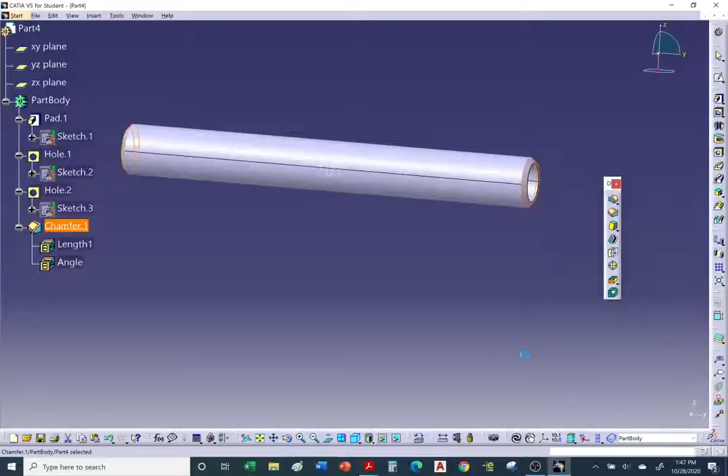We can always go back and create a second chamfer. We can just double click on the first one and select a second edge, so it'll do both edges under one command of chamfer instance 1. We don't have to do a second chamfer; we can do it all in one shot. There it is.

Let's go ahead and give it a name. Right click properties, product, we'll call it shaft. And let's give it some color. Right click properties, go to graphic. Right click on part body, go to graphic, and let's give it a smooth color. I'll use blue.

If you want, you can go ahead and save it. Let's go on to the next part, which is the knuckle.

For the knuckle, to make it easy, we're going to sketch about the origin. We'll draw half the profile when we do the spherical portion. So first we'll start with the rectangular sketch, do a pad, and then come back and do a profile of the spherical portion and do a revolve or a shaft command.

Let's start with a 20 by 20 rectangle. Once again, go to Start, Mechanical Design, Part Design. Let's do a sketch on one of the vertical planes. I'll pick the YZ plane. Do a sketch.

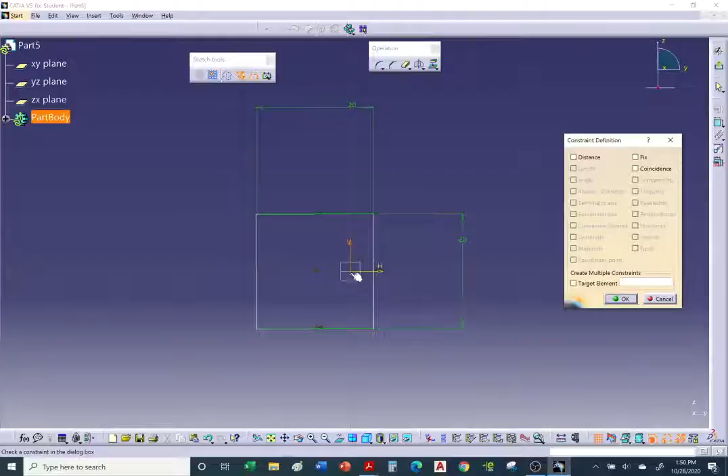Oh, and I missed something. Somehow this dimension—whoa, I didn't pick the origin. I need to constrain it with the vertical. I misclicked; I didn't exactly pick the origin. So I'm going to pick the center point of the rectangle, hold the control key, and make it coincident to the vertical. It did end up being coincident to the horizontal, but not the vertical. I just slightly misclicked, so let me fix that. There it is.

Now let's go ahead and do a pad. Exit, do a sketch analysis first—pretty sure everything is fine. Let's do a pad of 10 in each direction and do mirrored. There's our cube, our 20 by 20 by 20 cube.

Next thing we're going to do is our spherical portion. I'm going to pick a vertical plane—I'll pick the YZ plane to do our sketch of the spherical portion. This is going to be a little bit tough.

I'll start with profile. I'm just going to do a rough sketch of the spherical part, starting with the vertical, which later I'm going to line up with this edge. Click, and then I'm going to do an arc. As you can see, I'm already creating the profile. Click, and then I'm going to do another arc, tangent to that one.

I'm trying to pick the horizontal, so I only need to draw half of the profile. I'm going to constrain it so it lands on the horizontal axis, and it'll constrain it. There it is, and hit escape. So there's a rough sketch of our profile—click and space to deselect.

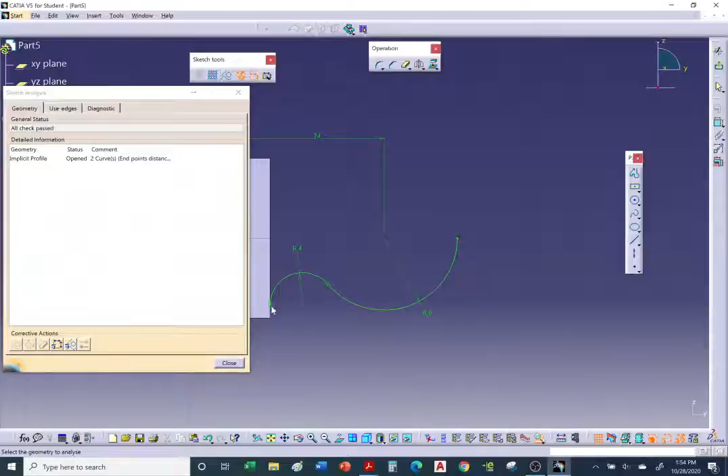We're going to do a tool sketch analysis. It's going to give us a warning: hey, this is an open profile. You can see the cyan circles letting us know it's open—those are the endpoints. We're going to accept it. All right, so let's go ahead and exit.

Okay, so now I'm going to do a revolve. If it refuses to do the revolve or the shaft, I'm going to have to go in and close the profile. Let's try it without closing it, see if it'll work. So I'm going to select the sketch and do the shaft command, or revolve.

Seems to accept it. Okay, we're going to rotate it about the horizontal axis of our sketch. Another option is to rotate it about an axis—so we can rotate it about the y-axis. The y-axis is right here; this is the y, the z, and the x. So you have the option of picking the y-axis.

Okay, watch what happens—y-axis gives us a preview. And we're going to rotate it 360. Again, another option for axis could have been the horizontal axis of our sketch. You can pick it from here, or we could have picked it from the tree, the horizontal. And okay, there it is. That's how you do our knuckle.

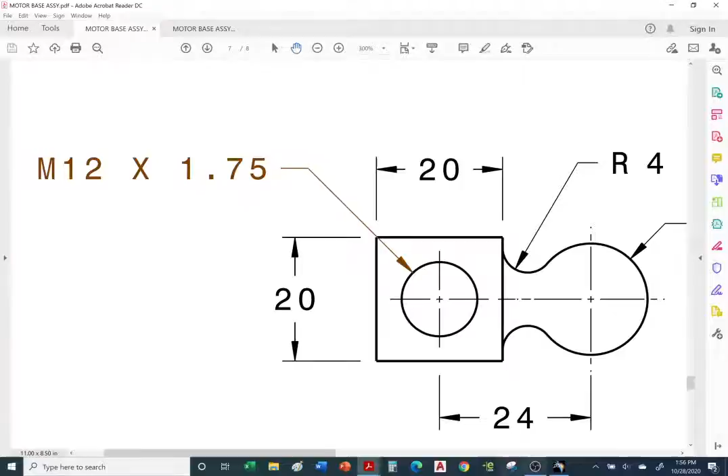All right, so let's go back. We're not going to model threads—we're just going to do a simple hole and exit. And we'll do a pocket.

Okay, so let's do a pocket, and we'll go up to last. We're also going to have to go in the opposite direction, so we'll go to the second—go to more, so we can also go up to last in the other direction. Okay, and the hole goes all the way through.

Okay, so that's the knuckle. It's probably going to be the most difficult part—a lot of students get stuck on this one. That's why I wanted to model it, show you step by step how to do it. You can get lost trying to create the spherical part.

All right, so let's give it a name. Okay, so this is referred to as the knuckle because it looks like part of your knuckles, right? Looks like one of your knuckles, so.

Okay, and let's give it a color. So I right click on the part body—let's make this a little brighter than the others, graphics tab. Don't make it too bright. More colors—okay, I'll pick a lighter color. Doesn't really matter.

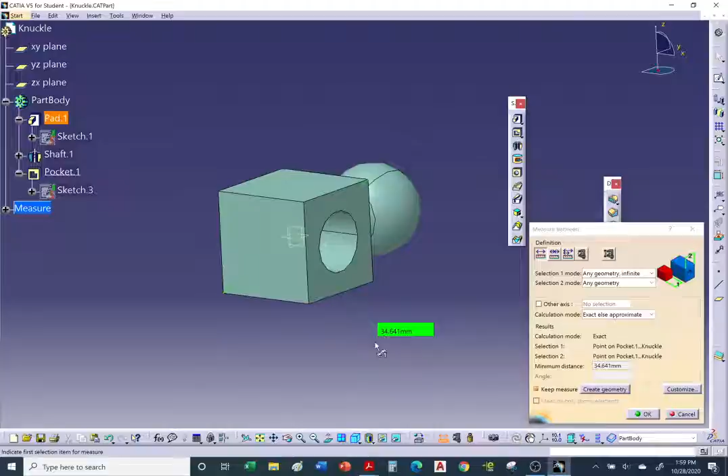Okay, cancel. All right, so here's what I'm going to do. I'm going to do a sketch to round off this corner. There's a faster way of doing this if we were to use surfacing, the generative shape design workbench, but some of you or most of you have not taken that class. Okay, so I'm going to have to do it the long way.

I'm going to do a sketch on this vertical plane, on the YZ plane, and I'm going to draw a circle at 34 in diameter. Remember, the diagonal measurement was just over 34, so I'll just round it down to 34.

All right, so again, we're trying to round off the corners. So what I'm going to do is rotate this sketch to remove the sharp corners. Let me go ahead and hit normal. So what I'm going to do is change this to a construction element.

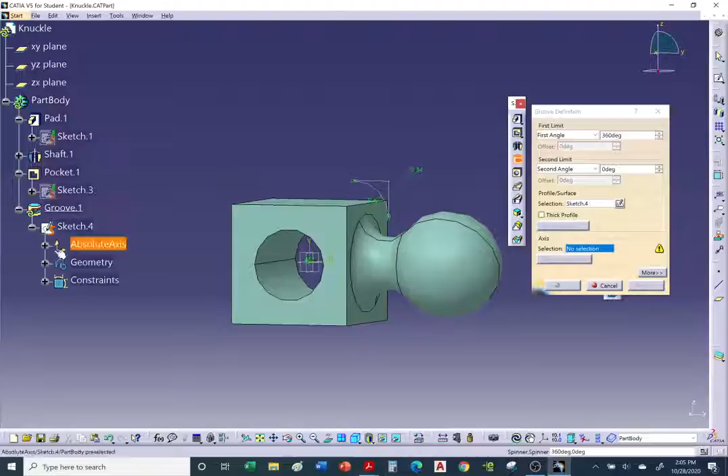And as you can see, it's cutting through the corners. Notice it only cut through a portion of it. So let's get the preview. See, the sketch is cutting through, as you can see.

So I need to take the sketch and just pull it outward a little bit so it eats up the other portion. Okay, so let's adjust our sketch, stick it a little bit outward some more. Let's exit. And now you can see it's rounding off the corners.

All right, so what I'm going to do now is mirror the other side. So go to sketch, select this, and we're going to mirror it about the vertical.

And if we want, we can put a dimension now on this line. There it is, it's green. I'll make it 20. See if that works, 20. Now we can always come back and adjust it, and exit.

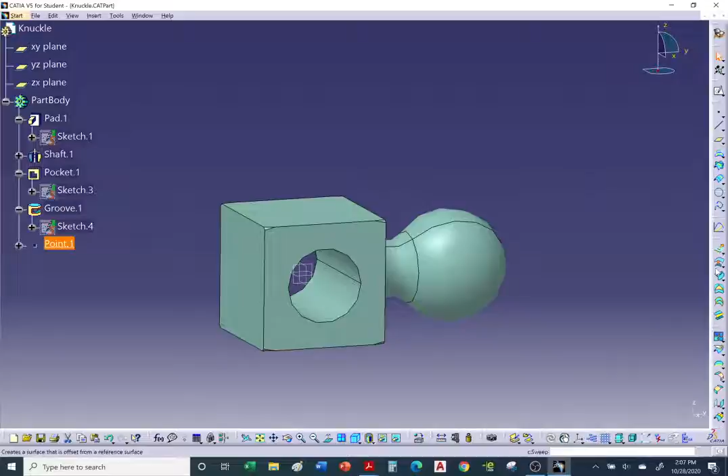First I would place a point at 0, 0. And I would draw a sphere. This is just surfaces about that point. It actually defaults to the origin, so pick the sphere option and reduce the size of that sphere. And then I would chop off those corners with the sphere. That's what I would do. This would be the right way of doing it.

Okay, so let me undo a few times. This would be the correct way of doing it, but we don't cover surfacing in this class.

Let's go back to our drawing. So we have our knuckles now created. And finally we have the hardware. So I will include in the email the hardware, the bolts, nuts.

You can model your own, or you can also download them from the catalog in CATIA. And I'll go over that in a few minutes.

What? It's bothering me that this doesn't look right. Let me go back to our sketch. What I'm going to do is remove this radius.

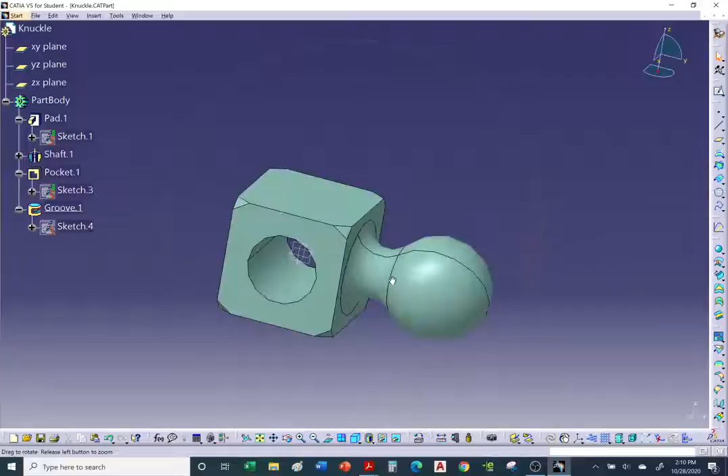Okay, so let's go back to the sketch. So what I did is I changed this to a radius of 10. 6 was just way too small. And now we can add a length here. Again, we're just guesstimating. I'll change it to 20.5.

Just didn't look right, so let's see if this looks better. Yep, so we rounded off the corners. All right, so...

Now let's go ahead and assemble this. Okay, so we're going to go with start, and we're going to create an assembly. Go to assembly design, it'll take you to an assembly window. Okay, now I'm going to go window vertical.

We can see all our items. So once again, if you want to see all your items that you modeled, go to window vertical. It'll give you a window of each item that you modeled, including our new assembly window, which is still empty. Okay, so I'm going to start by dropping the base plate.

Okay, I'm going to drag and drop. So left mouse click, hold, and drag it and drop it into the product. That's one option. Don't try and drag a large assembly into another assembly. It'll eat up a lot of memory, and it may end up freezing your computer. Okay, so I'm just going to drag and drop these items.

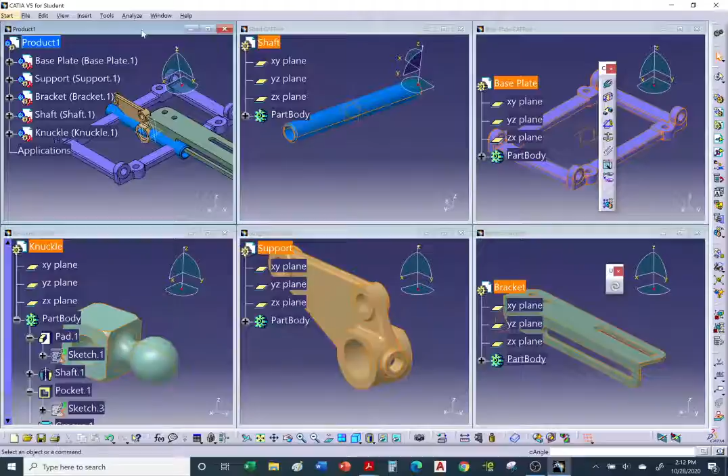All right, so let's maximize our assembly. Double click on the frame or hit the maximize button. There it is.

Okay, so we are to make assemblies. Going back to our handout, we're going to create sub-assemblies. Notice the little red axis. I'm going to hit the branch here, it's already at max, to exit tree mode. There it is. You can always hit the little white axis at the bottom right corner to exit the tree.

These little red axes tell us that these are individual components, so we need to create sub-assemblies. If we go back to our drawing, let's go to the beginning. We have our top assembly, and we have these individual smaller sub-assemblies.

Let's create the shaft sub-assembly first. It's the shaft and two knuckles. So we're going to create the shaft assembly.

To add a new assembly inside, we're going to go to Product here, to create an assembly inside of this main assembly. Let's first give this main assembly a name, and let's call it the top motor base assembly. Okay, there it is.

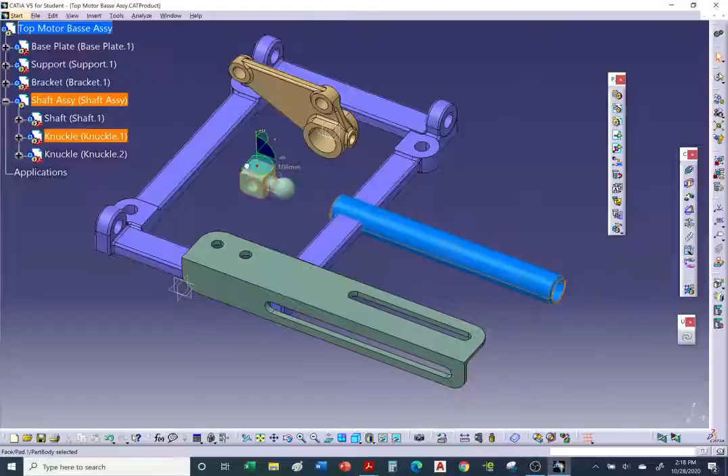So let me drop the compass. The mistake you're going to make is, hey, I'm going to move it over, drop it on the knuckle, and then try to move just the knuckle - like, wait a minute, why am I moving the entire binder? Because you need to first activate the binder. Let me reset compass and do it over again. Double click on the binder. Double click. Click in space to deselect.

Now the binder is active, so now you can move the things inside the binder. Activate the binder to move things inside the binder. Now drop it on the knuckle. Notice it chose the first knuckle, instance 1.

Now I can move the first one. I'm going to rotate it to line it up. Grab the arc, so if you grab the arc, it'll rotate, and we're going to insert it inside of this hole. All right, so let me view, reset compass.

So we're going to insert the knuckles inside the shaft, and we need to line them up. I'm going to open up the binder on its own, in its own window. It's too crowded, so I'm just going to take the binder out of the backpack, right click, and look for window.

Open a new window, and it'll open it up in its own window. There it is, so here's the binder. We took the binder out of the backpack so we can rearrange the pages, or in this case, the knuckles and the shaft. So let's start by anchoring the main part, which is the shaft.

So let's bring over our coincidence or our constraints toolbar. We're going to anchor the shaft, the main part, and you can see now it added an anchor.

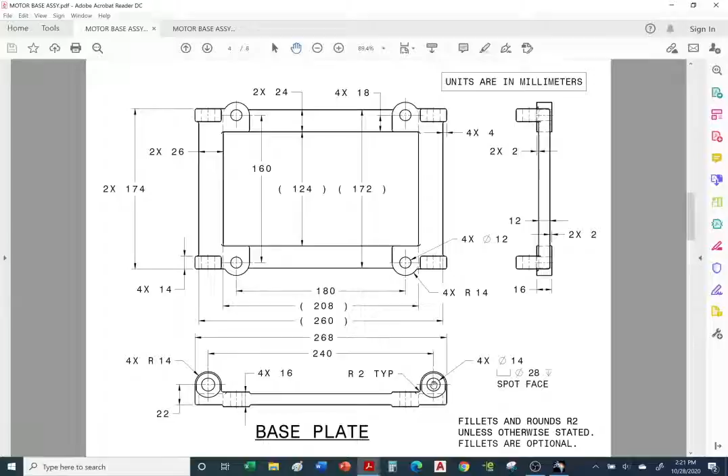So it's 240. Okay, so once again, the holes of the knuckles are going to line up with these holes where the long bolts go through, and it's 240. Okay, so let's go back, and we're going to add a dimension from the axis of this hole to the axis of this one.

My mistake, we're going to do an offset constraint. Cancel. Oh yeah, we were doing an offset, my mistake. Offset constraint, axis to axis. If you can't pick the axis, zoom in. Axis. Okay, and we're going to go with 240 millimeters. And okay, and update. 3, 2, 1, update.

Okay, notice it did keep the 240, but now these are not centered correctly. So we need to take 240 and cut it in half to 120. So we're going to go from the center vertical plane to the axis of 120, which is half of 240.

So let's do another offset from this vertical to the axis or the plane, either one will work, and let's make it 120, half of 240. And okay, and let's update in 3, 2, 1, update.

And whoa, it went in the wrong direction. So there's the 120. So you can see, we need to put a minus to go in the opposite direction. So let's double click on the 120 and just put the minus in front to change the direction. And enter and update. And there it is, so there we have it.

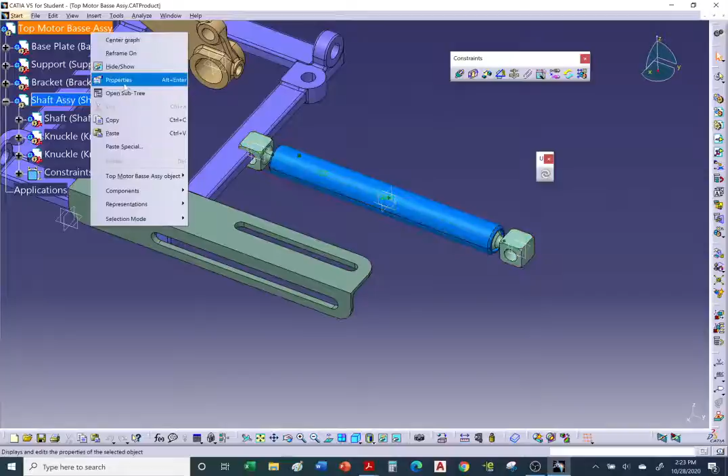Okay, so we're done with the shaft assembly, and let's go back to the motor base assembly. Top motor base assembly. I misspelled base, let me right click properties and change the name. Put one too many S's. Okay, so there's our assembly.

Once again, we need to line it up with the holes on the base plate. I'm going to do a coincidence between the hole of the knuckle and the hole of the base plate. Notice how it doesn't let me pick it? The reason is because the binder is active. You can only add constraints to things inside the binder.

So we need to hit escape and exit the command, and move things within the binder. We're going to attach the binder to the base plate inside the backpack. Let's double click on the backpack or the top motor base assembly. Click in space so you can see it's blue, it's active. Now we should be able to go coincidence from this hole to this hole and hit update.

Before I do, I want to anchor the main part. I forgot to add an anchor to the base plate. The base plate is the main part. Let's put an anchor on the main part, the base plate. There it is, and you can see the constraints here. And update. 3, 2, 1, update.

Okay, so now we have this knuckle in line with this hole. Now we need to do the other one. Let's see if we can do it. Let me move over this bracket here and reset the compass. Okay, so now we're going to put a coincidence between this hole and this one.

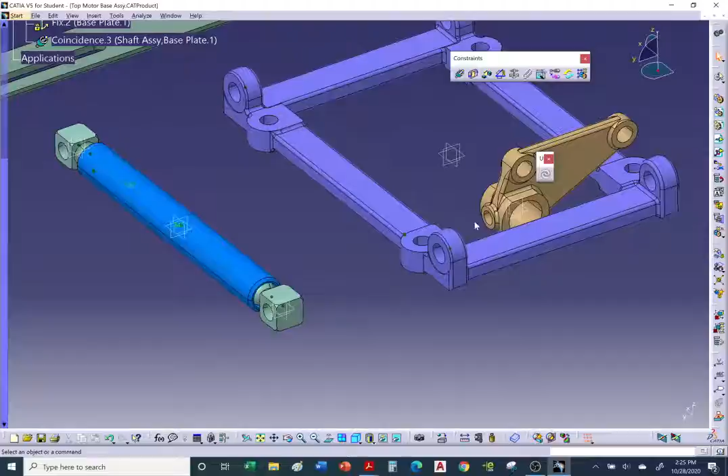All right, so now let's add a distance between this face and the face on this side. I'm going to add a distance from this face to this face. Now I want it to go in the opposite direction, so I'm going to make it positive instead of the default, which is negative. Let me type in 50. And OK, and update, and there it is.

I'm going to reduce it to 25. 50 seems to be too much. 25. OK. And update.

All right, so now let's move to the next assembly. Next assembly is the support and the bracket. Okay, so we're going to add a new binder. Let's add a binder to the backpack, a binder made up of the bracket and the support.

Okay, go back to the drawing. So we're going to call it the support assembly or sub-assembly. We're going to put these together. Support sub-assembly or assembly.

Okay, so let's add a new binder in our backpack. Product, put it inside your backpack. You have to tell it where. Okay, so we're going to add a binder inside the backpack. You can also add an assembly, a pouch inside the first binder, but no, we're going to do a separate new binder in our backpack.

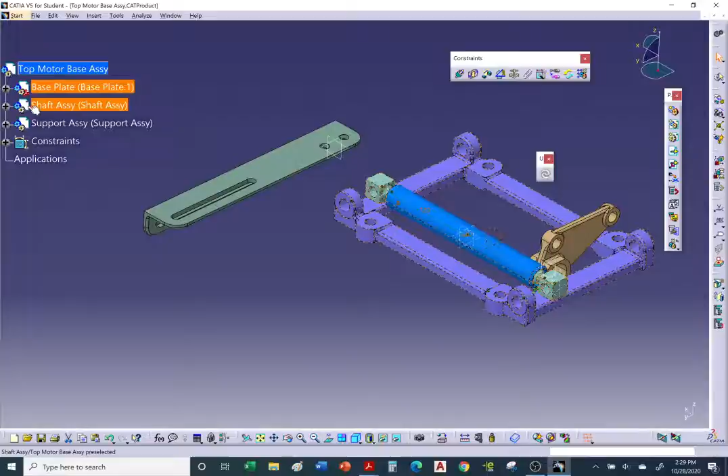Okay, so now let's go ahead and open up the support assembly in its own window. Right click and look for window, open a new window.

Okay, so let's start by anchoring one of the pieces. Even though the bracket is longer, I'm going to go with the support, because this supports the bracket. So I'm going to anchor the support, and now I'm going to attach the bracket to the support.

What I'm going to do is put a coincidence between this hole and that hole, between the hole of the bracket and this semi-cylindrical shape. So I can grab the axis of this semi-cylindrical shape, click, and update. It'll line it up, as you can see. It lined up the hole with the slot, or at least the right axis of the slot, not the left one.

Okay, and now we're going to do a face-to-face. I don't remember if the face goes to this surface or the other one. Let's go back to the drawing. Okay, so this surface of the bracket touches the opposite surface of the support. Let's go back. I'm going to put a face-to-face contact between this outside surface and this surface. And update, 3, 2, 1, and update - there it is.

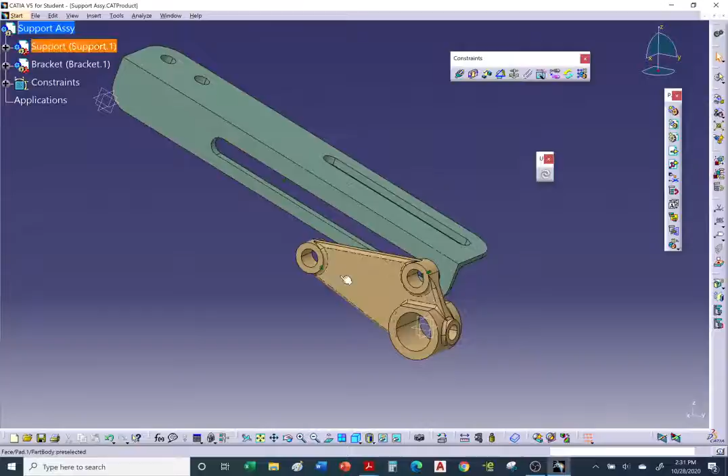Now, what happens if I was to rotate this bracket? So I'm just going to rotate it, and let's say it was misaligned. Let me reset my compass. So let's say you wanted to line up this bracket with the support and you didn't know what to do - you can add an angle constraint.

So I'm going to put an angle constraint between the top of the support, this flat surface, and this surface. Or you can pick the edge, either one will work - I'll pick this surface. Right now the angle is at 20, and I want to change it to 0 degrees. Okay, 0 degrees, update, and it'll straighten it out. So it lines up, so that the slot also lines up with this hole. This bracket can slide back and forth along these two holes.

We're missing the hardware, we'll come back and fix that. All right, so let's go ahead and go back to our top motor base assembly. And there it is.

Okay, so the next thing is to line up this hole with the shaft. Make sure you have the binder, the backpack, the top motor assembly activated - double click, it's already blue, it's already active. So now we can move the binders inside the backpack and line up this hole with this shaft. So we're going to line up this binder with this binder using the coincidence constraint, put a coincidence between this hole and the shaft, just pick on the cylindrical surface, and update. There it is.

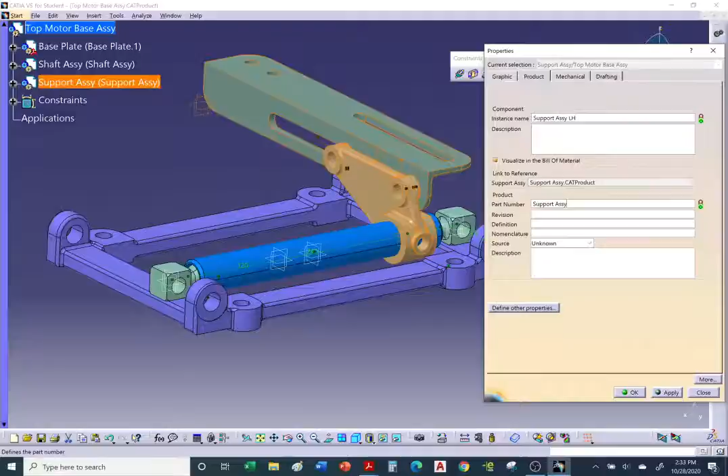Now let's move it over to the left. So this is actually the left support assembly. Let me actually fix the name - I'm going to right click properties, support assembly, and go LH. That stands for left hand support. So I'm going to call it the LH, left-handed support assembly, because there's also going to be a right-handed one. Okay, so let's move it over.

All right, so let's put a distance between the knuckle and this face. I'm going to put a distance between this surface and this surface. You can also pick a point, by the way - you can put a distance between a surface and a point, or an edge, or a line. And I'm going to go with 25, see how that looks. 25, offset, okay, and update in 3, 2, 1, update. There it is, that looks good.

All right, so we're still missing the right-hand side, and I'll save that for last. Let's start adding some hardware, the bolts and nuts, and then we'll do the right-handed side, the support assembly RH, right-handed. We'll do that at the end. Okay, so let's bring in the hardware.

So now I'm going to use the insert command. Click the yellow arrow, go to the top assembly, and you're going to go to your folder where you saved it. So I'm emailing you the hardware, the bolts and nuts, unless you want to model your own, and they do not have to be accurate if you decide to model your own for practice.

Okay, so let's look for my hardware here. Here it is, I have my hardware. There's not that many items, so I'm going to hold the control key and select all of them, and I'm going to insert them into my top motor base assembly. And open.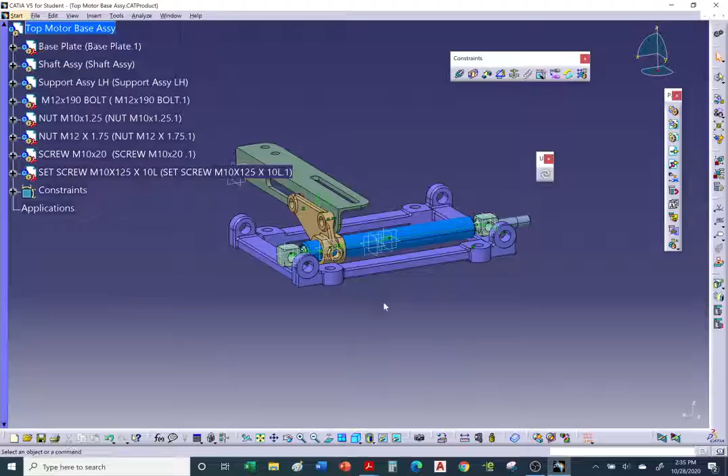Now where are they? They're right here in the middle, all on top of each other. So they land at coordinate 0, 0, 0.

Okay, so this hardware, the long bolt is part of the binder. So we're going to line up this screw. My mistake, this bolt is part of the backpack. So this is not part of one of the smaller assemblies. We can go back to the handout. Notice we don't have a long bolt in any of these sub-assemblies, so it's part of the main assembly, the top assembly.

Okay, so let's take this bolt and put a coincidence between the bolt and the hole, and update. There it is. Okay, so now we're going to put a... by the way, it doesn't matter if we insert the bolt through this side or this side. I'm going to rotate it so this surface matches up with this surface, so I'm going to put a contact constraint between the bottom of the head of the bolt and this spot face. Click and update, 3, 2, 1, update. And there it is, there's the bolt.

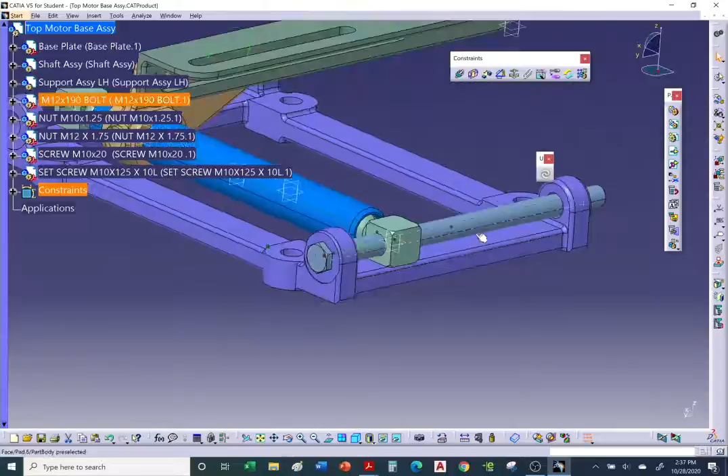Okay, so to bring in the catalog, let's see if I can find it. It looks like a book. Actually, there it is, having trouble finding it. Okay, so there's a catalog of hardware. You can go to this catalog, click it, and it'll take you to a library of bolts and nuts. You can click in here in space and zoom in. So if you want a bolt, just click on the bolt, it gives you a preview.

You can follow an ISO standard if you like, the international standards, or you can use the US catalog, American standards. I'm going to stay with ISO standards since they mostly use millimeters and not inches.

You can double click on bolts, and let's see, you can zoom in, and it'll give you a library of different types of bolts. Okay, you can go to the pull down here. Oh, my mistake, double click. There it is, it wasn't loading in, so I had to double click again and it loads all these types of bolts and nuts. So here are the sizes and lengths. This is an M14. I believe the one we're using is an M14 or M12.

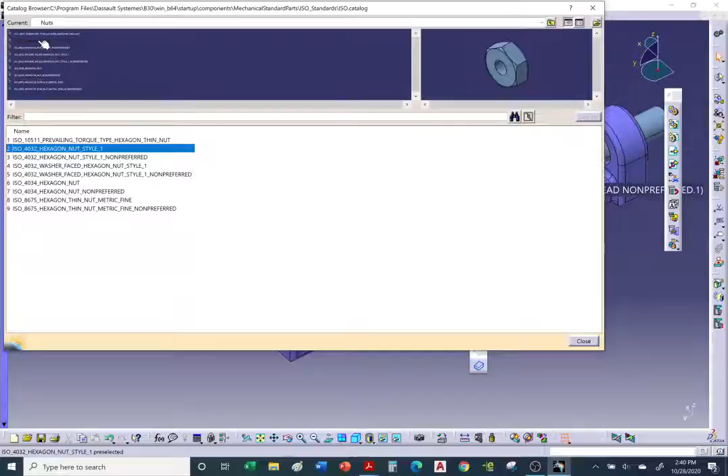If you want to bring in a nut, for example, let me go to the tree here. Let's see, let me exit so I can pick hex nut. Go to catalog again, and I'm trying to go back to hex nut. Let's see if I can go to the drop down here, go back to ISO standards. So I went back to ISO standards, and if I want to bring in a hex nut, there it is, the folder of hex nuts. Double click. Okay, so what style do you want—hex nut with the washer or just a plain hex nut? I'll just randomly pick one. Double click, let me double click again. There it is, it loads it. So I was looking for an M12 or M14.

Let me just randomly pick one. I'll use an M12, I don't see an M14. Okay, so double click and it'll load it. And there it is, it brings in an ISO standard nut. Let me go ahead and close my catalog.

So you need to do this inside of an assembly, or else it will not load it. If you're in part design, it will not load it. You have to be in an assembly to load hardware from the catalog. If it's not the right length bolt you're looking for, just alter the bolt, make it longer, and save it with the new name.

So I'm just going to go ahead and delete these, I just wanted to show you how to bring it in. So I'm deleting it, and it creates a window. When you delete an item that has not been saved, it'll take you to its own window.

Let me go back to the motor base assembly. Let's delete this ISO hex nut. I'm going to delete it. Hey, do you want to open it in its own window because you haven't saved it? Nope, it's okay, I don't want to deal with that. Okay, so here we go.

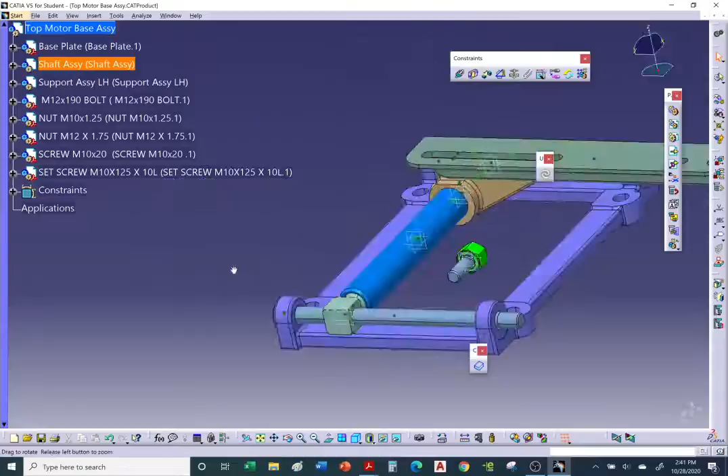Or once again, you can just use the one that I emailed you. All right, so now let's line up the hex nut with this bolt. Okay, let me use the compass to spread things out a little bit, and just drop it on there.

Let me just pick this first, this smaller screw, and just move it out of the way. Grab this hex nut, I'll pull it upward. Here's a smaller hex nut. Notice how I saved the bright colors for the smaller items. And we have the set screw.

Okay, so let me reset compass, view, reset compass. All right, so let's go ahead and add this large hex nut to the screw. So let's use coincidence and zoom in far enough so you can grab the axis. There it is, and the axis of the bolt. And let's go contact face to face from this surface to this one.

Ooh, maybe I need a washer for this so it doesn't damage the surface. I'll leave out the washer and let's hit update. And there it is.

Okay, so I'm going to make a copy and place them on the other side. I'm going to use this long bolt and this hex nut. And these are M12s, so those are diameter 12 holes and shaft.

And copy. And right click at the top, backpack, and paste. Okay, there they are. Using the compass, just drop the compass on a flat surface or plane. Select the bolt, hold on to the control key and the nut. So this is the new bolt and nut. And now I'm going to slide them over with the tree. Let's reset our compass.

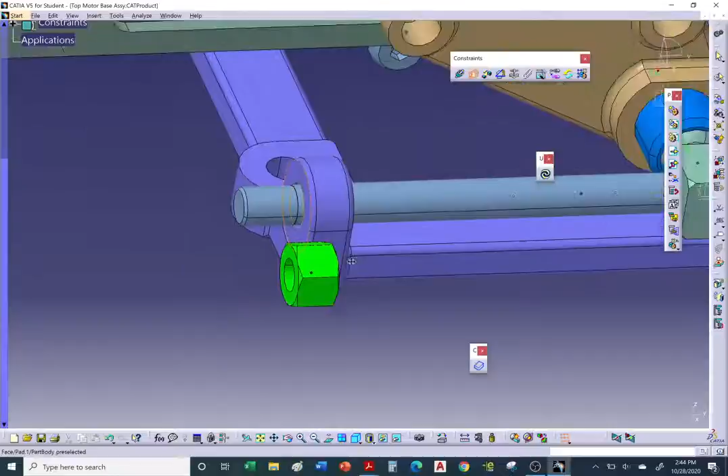Okay, now let's do the nut. Coincidence between the hole and the bolt. I'm going to speed it up a little bit. Contact face between the tab and the hex nut, and update. All right, so we took care of that.

Okay, now we need a set screw. So this is a smooth shaft, and as you can see, the support slides along the shaft, but it'll rotate, and since it's a nice inline fit, it's still loose. We need to screw it down or lock it down with a set screw. So here we have a set screw.

Okay, so we're going to put a coincidence between the set screw. As long as you pick a cylindrical or conic shape, it'll pick the axis, and let's pick the axis of this hole, this tapped hole.

And now we're going to do an offset between this surface and this surface, and I'll leave it at 0 and adjust if need to. Hit OK, and we're going to update. And there it is.

Okay, so to prevent this support from sliding or rotating along the axis of the shaft, we tighten the screw to lock it in place. We don't use a regular screw with the head because we don't want to over tighten it and damage the shaft. So we use little set screws where it limits our torque and we don't over tighten.

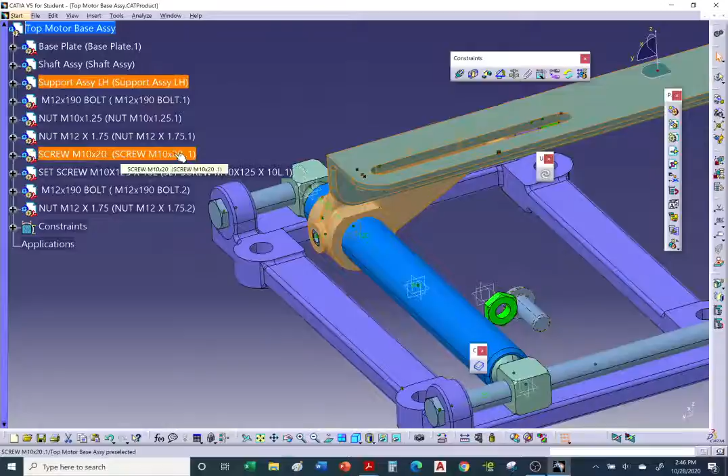Okay, so this is the binder. We want to drag this small bolt and nut. I'll just drag it and watch how it populates the binder. Okay, so here's the bolt, we're going to drag it into this binder. There it is.

Now we're going to take the hex nut and drag it into this binder. There it is. So the binder, as you can see, anything in orange is part of this binder. And just to verify, notice how we have the bolt and nut part of this left-hand support assembly.

We can add constraints here between this bolt and nut onto the support, but we need to double click on our binder here, our support assembly left-hand side. We need to double click to add constraints between these items. Okay, let's add a coincidence between this bolt and this hole, and a contact between this face and this face. Let's hit update, 3, 2, 1, update, and there it is, there's the bolt.

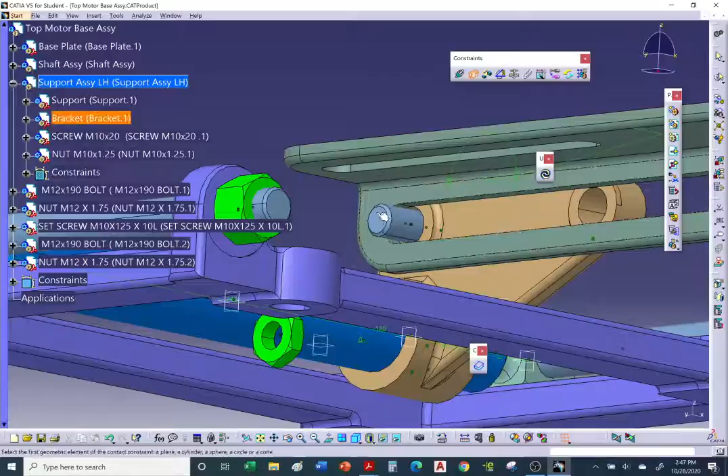Okay, now let's do the hex nut. Let's do a coincidence between the hole and the screw, and finally a contact between this surface. Oh, wrong surface, hit escape. We're going to do a contact surface. We should actually put a washer. I left out the washers by mistake. We'll just leave them out for time. Surface and surface of the nut. Okay, hit update, 3, 2, 1, update. Yeah, so we should have added a washer. I'll just leave it out because of time.

All right, so now we need a second set of screw and nut. I'm going to make copies of the screw and nut. Hold down the control key, select them, copy, and paste it back into the binder. Notice now these are .2. So the first two was coincident 1 and 1. Now we have coincident 2 for the screw and coincident 2 for the nut. They're copies of each other, so if one screw is altered, the other one will also be altered.

Okay, so I'm going to use the compass. I'm going to drop it on this surface. Then I'm going to pick the nut, the second nut, not the first one, and slide it along this surface, pick the inside surface here. There it is. And I'll pick the second screw, not the first one. The first one's already constrained. And slide it over or upward. Okay, let's reset the compass.

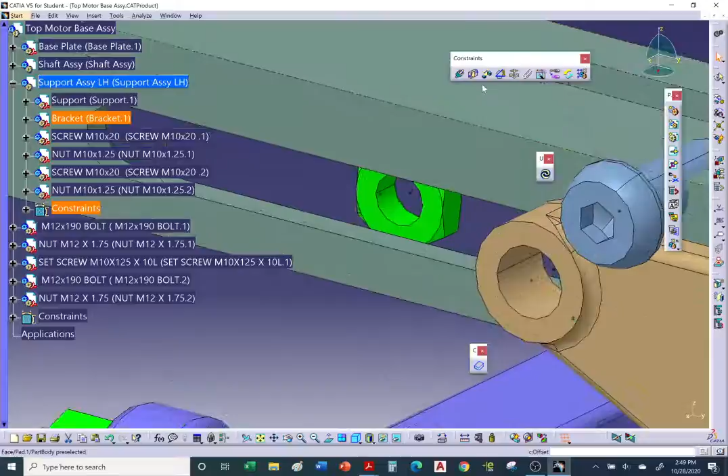Again, note that this binder is active. It's blue because we're moving items inside of this binder or constraining inside this binder. Okay, so let's add some constraints. We're going to put a coincidence between the bolt and the hole, and a coincidence between the nut and the bolt. Let's add a contact constraint between this surface and this surface, and another contact constraint between this surface and this surface. Okay, and we're going to update in 3, 2, 1, update. And there it is, everything looks good.

All right, so looks like we're almost there. Let's go ahead and close this binder. Okay, so let's go back to our main assembly. So all we're missing is the right-handed support subassembly. Okay, so we have everything. The only thing missing is this right-hand support assembly or subassembly. Okay, so here's what we're going to do.

Let's go back. Instead of having to model these, what we can do is a mirror at the assembly level. So we're going to do a mirror at the assembly level. Let's go to the top assembly, double click on the binder, and we're going to do a mirror. Let's see if we have the mirror command in here. If not, I can always go to the drop down menu, looking for mirror, and I don't see it. Okay, let me go to the drop down.

Okay, here it is. I don't see mirror. Oh, but I see symmetry. That'll work. So we're going to do a symmetry of the left hand. Go to the drop down, insert, we're going to do a symmetry. Click on symmetry.

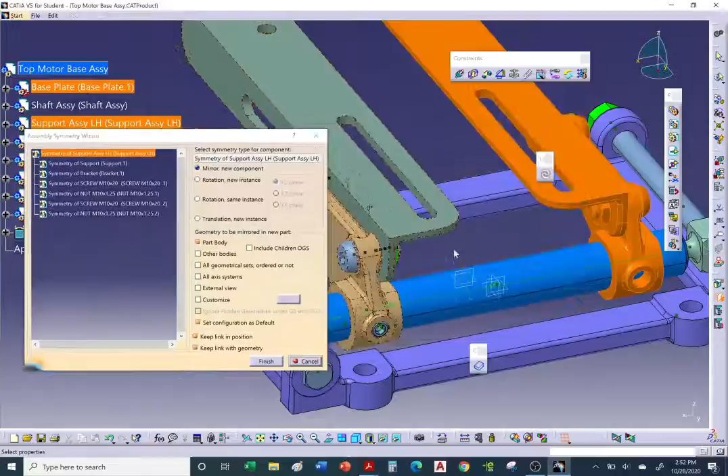Okay, now it's telling me what do you want to mirror? So we're going to mirror this entire binder here, the support, the left hand support assembly. Click. Notice it's giving us a preview. So there it is, it's mirroring everything over in that assembly.

All right, so you can mirror everything. You can mirror the geometric sets, the sketches, the pads, the pocket command. You don't need to mirror everything, but you have the options to mirror multiple items inside of each individual part. We don't need to do that, so we're just going to keep it at default. Once we do finish, it'll generate and create new files for the right hand side.

Notice this is the name it's given them. Now, one thing we do want to keep is a link between the positions, so it's always mirrored about the position of this one, and we do want to keep a link between the two. So if one changes, the other one will also change.

So we do want to keep the links, keep these on. You also have the option to rotate, translate. We're going to mirror it, leave this alone. We're just going to mirror. So you do have a bunch of options here that you can pick from. I'm going to leave it alone with the default settings and hit finish. Give it a few seconds, and there it is. It generates new files.

Now the right way of doing this is to rename all of these. Remove the symmetry and put RH. So this would be the support assembly RH, and we can call this support RH for right hand, bracket RH. The screws and nuts, we can leave them alone. But typically, out in the real world, you don't want to use the name symmetry. So, but I'll just leave it just for time. I don't want to go in and change everything.

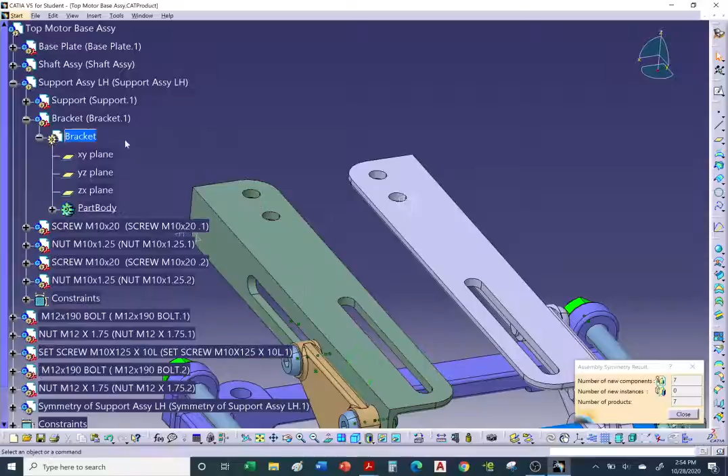My mistake, surfacing was the last workbench I used for an individual part. So I double clicked. Notice that this is blue. See how the bracket is blue? So this is what's active. Now currently I'm in the surfacing workbench. Let me move over to the part design workbench. Three, two, one, part design. You'll see it'll take me to the part design workbench and the bracket is still blue, letting me know it's active.

So I'm going to add a big hole here. Why? Just for fun, just to show you what happens. So I'm going to add a large hole. I'm just going to exaggerate, make it 25 and enter. Notice how this one turned red. This bracket is linked to the left-hand bracket.

So the right-hand bracket is linked. If there's any changes to the original one, and because we maintained the link when we did this mirror command or symmetry command, this will also update. Okay, so now let's go back to the top assembly. Double click at the top assembly, so it'll be able to update. Here's the update command. And in three, two, one, update. And watch what happens, it updates.

That's the cool thing about the symmetry command. These two are linked because we chose to keep the link between the two. Okay, let me go back, go back to the bracket, the left-hand bracket. It takes me back to part design workbench, and I'm going to remove that hole. Delete it. Okay, and it turns red. The right hand turns red, knowing there's been a change to its twin, or its opposite, its evil twin.

And let's go back to top assembly so we can do an update. Notice it's blue now, and update.

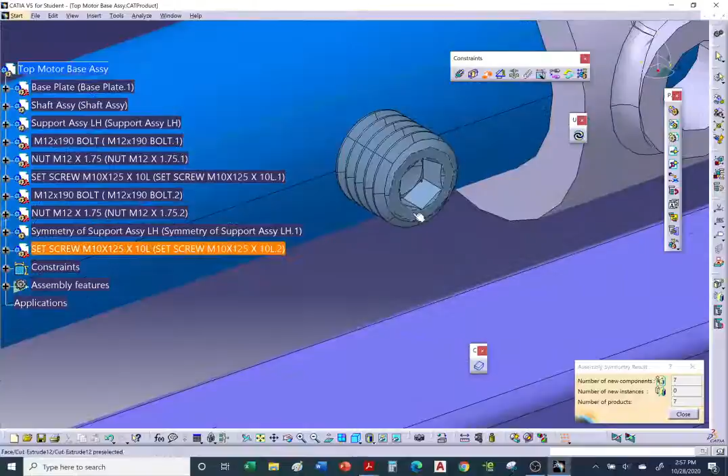Reset the compass, view, reset compass. And let's put a constraint of coincidence between the hole and the set screw. And let's use an offset between the face of the set screw and the surface. Okay, let's keep it at 0. Okay, and update. And there it is.

So let me redock these toolbars. All right, so now we're ready to save.

If you have not saved this - but one thing I wanted to mention is when I check your work, I'm gonna do an exploded view. But before I do that, let me go ahead and save this. So I'm gonna go to File, Save Management. These are all new items except for the hardware. So the ones that show open, that's the hardware that I emailed you. The ones that are new, these are new files that we created: the support, the brackets, the knuckles, the shaft, and the base plate. Okay, so let's go to the top assembly.

Okay, so go to the top motor assembly. There it is, it gives you a preview. So top motor base assembly. Once you save the top assembly, it'll auto save everything else.

Okay, I'm going to go save as. If you want to save it on your flash drive, I'll go ahead and save it on my flash drive. I'm going to create a new folder and call it a motor base assembly.

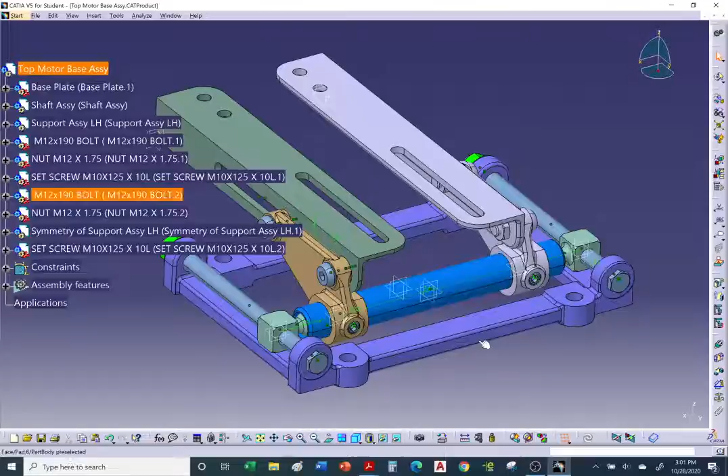Okay, so let's say I open your file - you emailed it to me, the zip folder with all your files that make up this assembly. So what I'm going to do is use the explode command to check to see if everything's constrained. I'm going to use explode.

I'm going to hit explode - it's giving me a warning when I hit OK. Are you sure you want to explode? So you can see everything is being exploded all over the place, and yes, things go flying all over the place. Now I'm going to hit update.

So if I constrain this correctly, it should all go back to its constrained position. 3, 2, 1, update - and it all goes back. Oh, except the set screw.

So this set screw, I missed it - somehow I missed constraints on this set screw. Update... oh, there it is. I hit update again, somehow it missed it, but I hit update again and it recognized the constraints and placed it back.

I think it's because the symmetry parts were not constrained. The symmetry parts are constrained with respect to the left-hand side, so I think it first had to constrain the right-hand side before the set screw could recognize its constraints to these symmetried parts. All right, so end of motor base assembly.